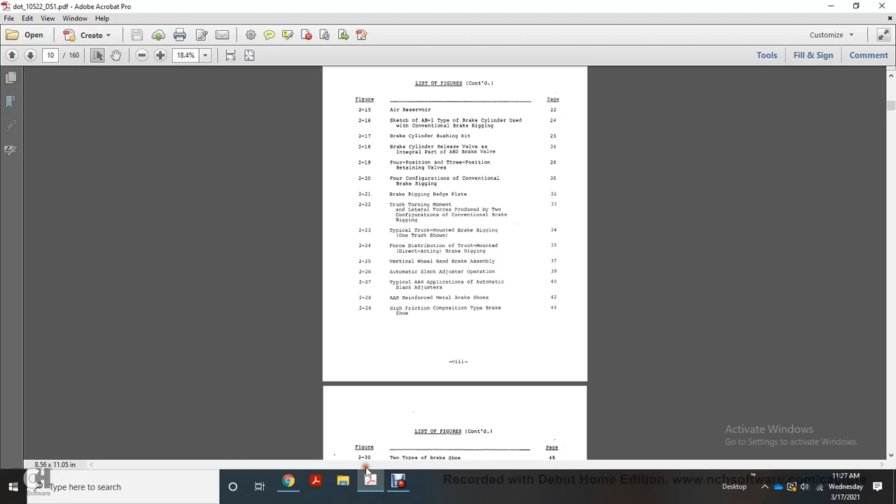Report number FRA-ORD 7822. Brake System Design Optimization, Volume 2, Supplemental Data. April 1981 Final Report.

Document is available to the public through National Technical Information Services, Springfield, Virginia, 22161. Prepared for the U.S. Department of Transportation, Federal Railroad Administration, Office of Research and Development, Washington, D.C., 20590.

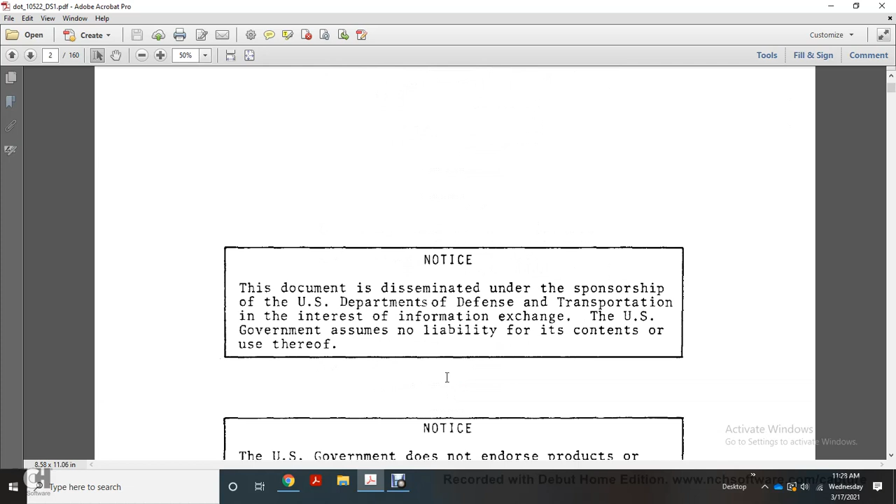This document is disseminated under the sponsorship of the U.S. Departments of Defense and Transportation. in the interest of information exchange. U.S. government assumes no liability for the contents and use thereof.

Notice: the U.S. government does not endorse products or manufacturers. Trade and manufacturer's names appear here only because they were considered essential to the objectives of this report.

And that gives you report number FRA-ORD 7822. The title is Brake System Design Optimization, Volume 2, Supplemental Data.

Preface. The work described in this report was carried out under the direction of the Transportation Systems Center of the U.S. Department of Transportation, in the context of an overall project with the Federal Railroad Administration, to provide a technical base for the improvement of rail transportation service efficiency, productivity, and safety. The work was sponsored by the FRA Office of Research and Development, Office of Freight Systems.

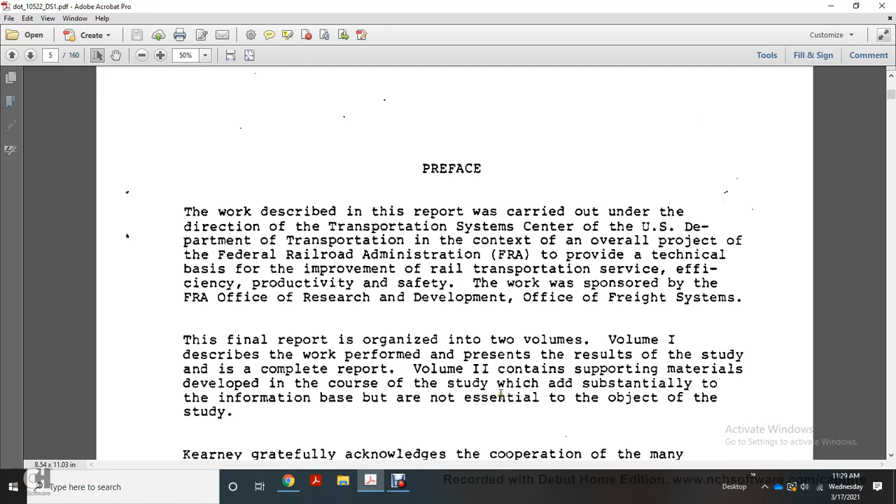The final report is organized in 2 volumes. Volume 1 describes the work performed and presents the results of the study as a complete report. Volume 2 contains the supporting materials developed in the course of the study, which add substantially to the information but are not essential to the objectives of the study.

We gratefully acknowledge the cooperation of many Railroad and Rapid Transit Companies, Manufacturer Research and Development Organizations, the AAR Brake Equipment Committee, and members of their staff and other interested parties who provided the information required to conduct a thorough, original, objective study. We would also like to thank DOT personnel in the Transportation Systems Center and the FRA for their cooperation throughout the course of the study.

And then it shows the metric conversion chart.

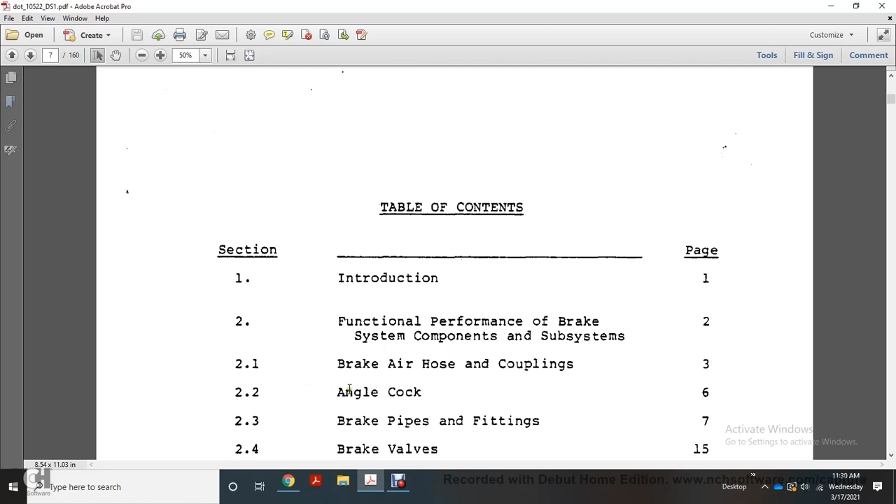Section 1 would be your introduction. Section 2 is functional performance of the brake system component subsystems, including the brake air hose, coupling, angle cock, brake pipe, fittings, brake valves, air reservoirs, brake cylinder release valve, retaining valve, brake rigging, handbrake, slack adjuster, and brake shoes. Then we move on to Section 3, Operation Performance and Design of the Freight Car Air Brake System: introduction, operation performance, problems.

Chapter 4 would be Railroad and Private Car Owner Survey: introduction, data requested from railroad survey, data requested from private car owners, results of the survey, thermal capacity of the freight car wheels.

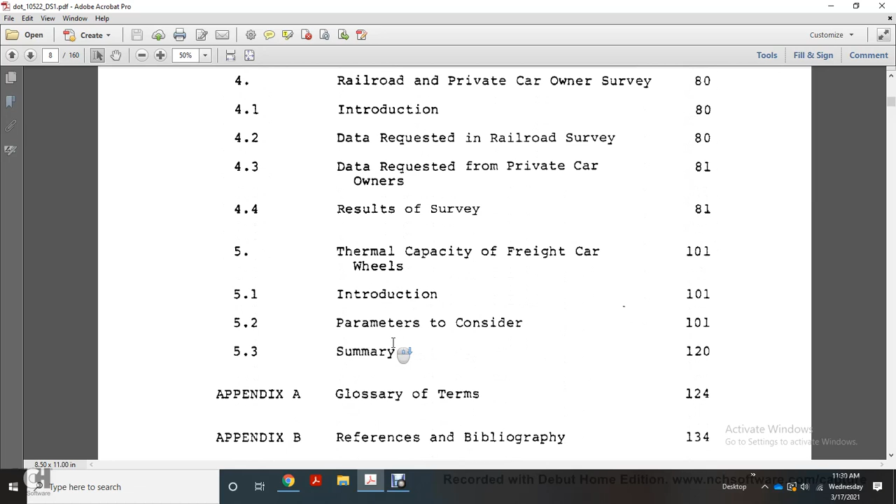Chapter 5 begins with introduction, parameters considered, summary, glossary of terms in Appendix A, and Appendix B, references, bibliography. List of figures: arrangement, brake system component, typical freight car, air hose coupling, typical angle cock.

Air hose location for the car with more than 5 foot 6 inch overhang, pipe arrangement, typical freight car, pipe fittings, approximate brake pipe gradient versus temperature for a typical 100 car train, approximate brake pipe leakage versus temperature for a typical 100 car train.

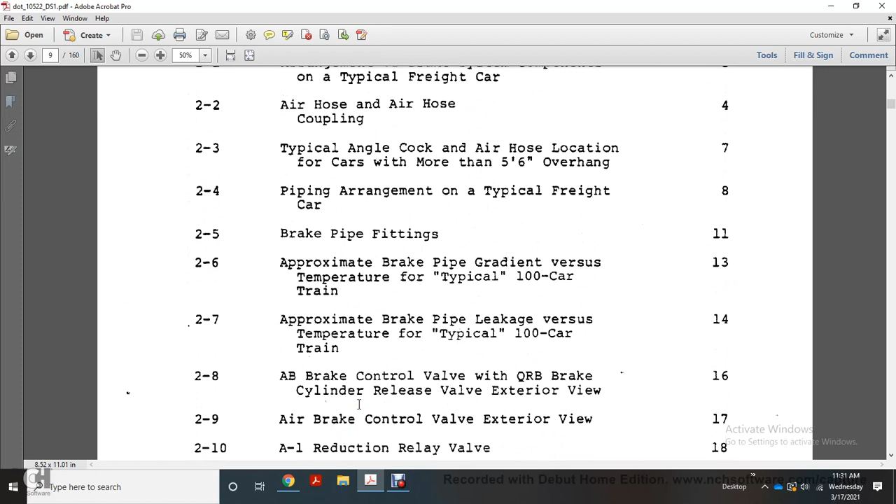Your AB control valve, quick release brake, cylinder release valve exterior view, air brake control valve exterior view, A1 reduction relay valve, the ABDW brake control valve, performance comparison, ABD, the ABDW brake valves.

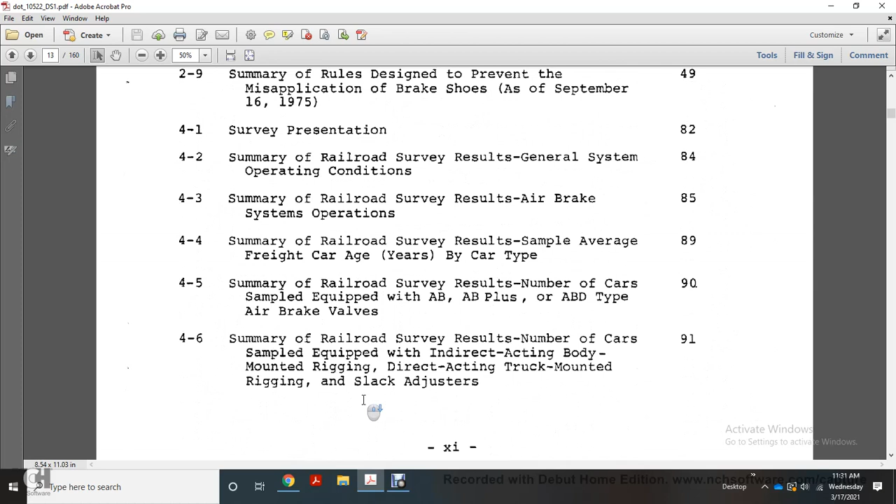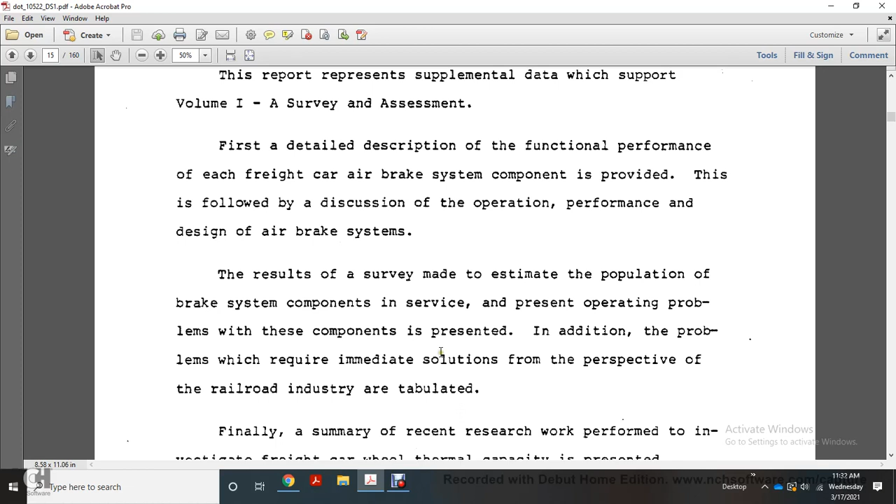Executive summary: this report represents the supplemental data in support of Volume 1 survey and assessment. First, a detailed description of functional performance of each of the freight car air brake system components is provided. This is followed with a discussion of operation performance and design of the air brake system, the results of a survey made with estimates of the population of brake system components, and the operation problems in which these components are presented, along with problems requiring immediate solution from the perspective of the railroad industry, tabulated. Finally, a summary of recent research work performed investigating freight car wheel thermal capacity is presented.

1. Introduction. The volume refers to the supplementary data of information which supports the material presented in Volume 1, Survey and Assessment. The volume includes 4 sections with 2 appendices. Section 2 covers functional performance of the brake system components.

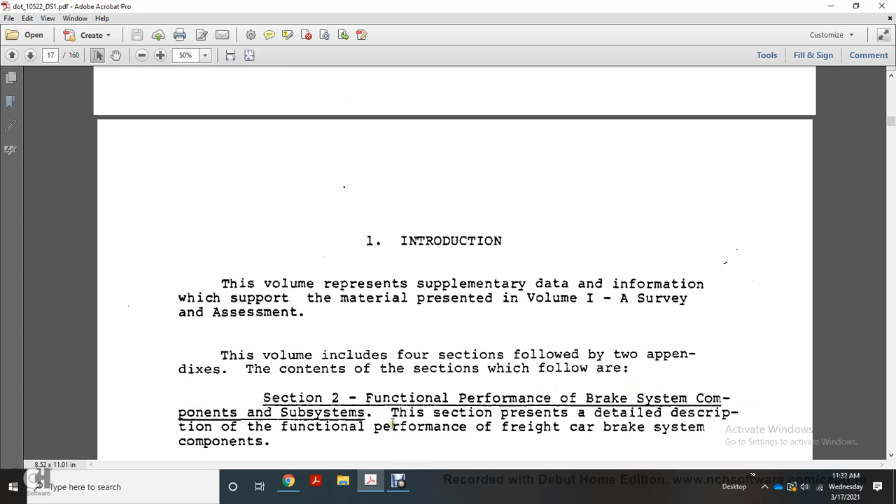Subsystem: this section presents a detailed description of the functional performance of the freight car brake system components. Section 3, Operation Performance and Design of the Freight Car Air Brake Systems, describes how various brake system components interact, and it delineates operating problems presently associated with each.

Section 4, Railroad and Private Car Owner Survey. This section presents the survey results of the railroad private car owner. The results include rail system operating condition of the air brake system, operating problems, air brake component populations, equipment being purchased, and special brake system equipment in service.

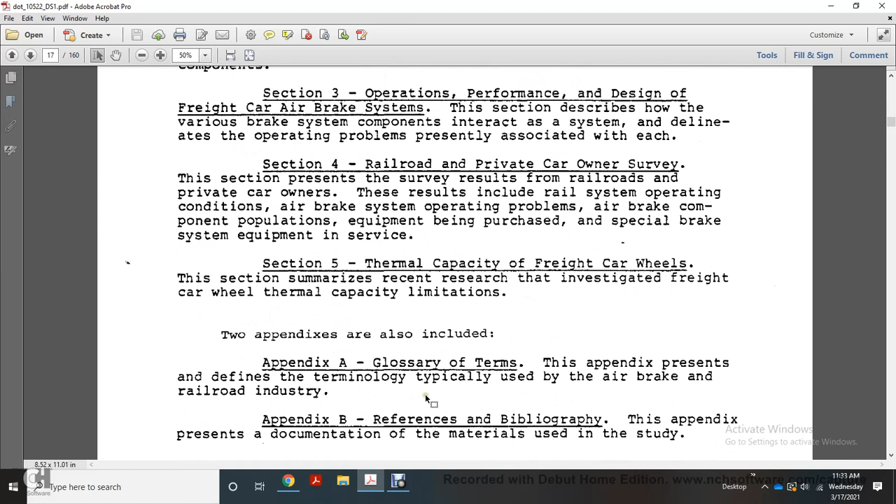Section 5, the thermal capacity of the freight car wheels. This section summarizes recent research that investigated freight car wheel thermal capacity limitations. Two appendices include a glossary of terms and a bibliography of references.

Section 2, Functional Performance of the Brake System Components and Subsystems. Functional performance characteristics of the selected brake system components and subsystems presently in use are presented in the following order: brake air hose couplings, angle cocks, brake pipes, fittings, brake control valves, air reservoirs, brake cylinder release valve...

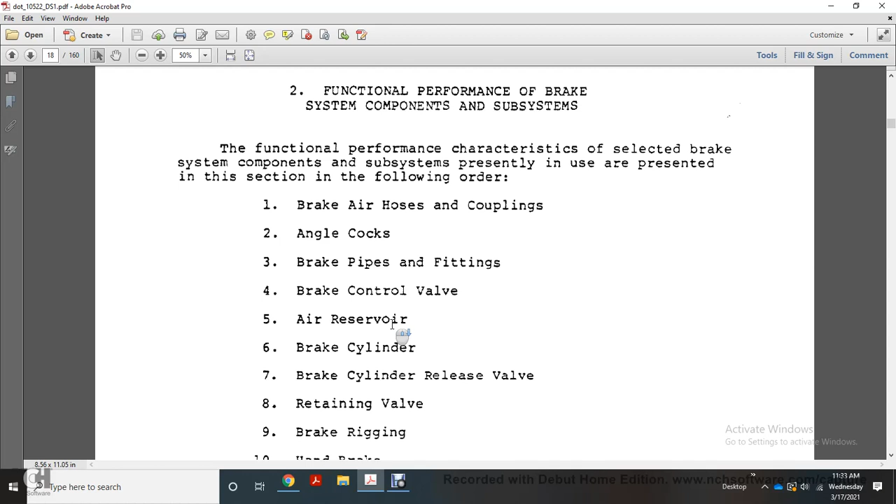Retaining valve, brake rigging, handbrake, slack adjuster, brake shoes. Each of the above brake system components and subsystems is discussed in terms of the need for the development of the performance, and any problems associated with their use.

Figure 2.1, presented on the following page, aids in illustrating the location of components on a typical car, indicating the function and interaction of the components with respect to a freight car brake system.

This shows the brake pipe, retainer, the ABD valve, the release rod, combined auxiliary emergency reservoir, auxiliary lever, brake cylinder, slack adjuster.

Cylinder lever, top rod, top lever connection, bell crank, brake shoe, hose and coupling, angle cock, handbrake, and truck lever.

Figure 2-1 shows an arrangement of brake system components for a typical freight car, sourced from the Air Brake Association, 1972, used by permission of the copyright owner.

2.1 Brake air hose coupling. The air hose coupling glad hands provide a flexible brake pipe connection between cars in a train.

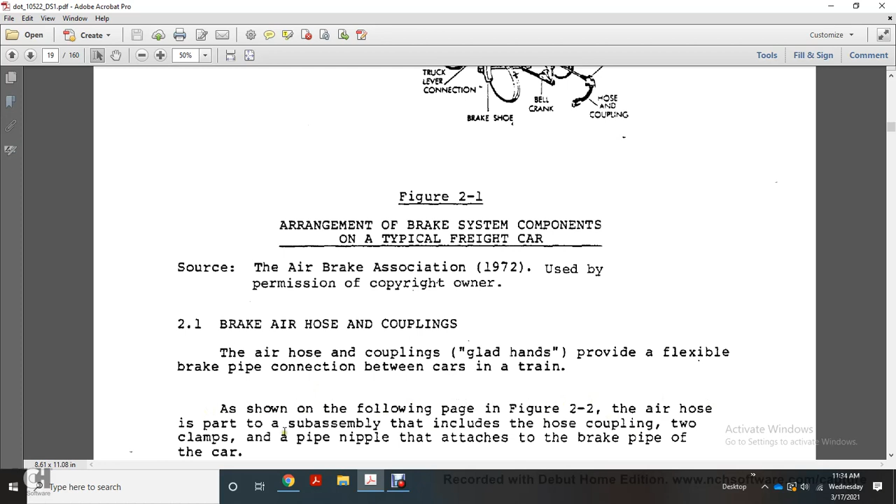Source: Association of American Railroads, 1978b, page E-51-1978, used with permission of the copyright owner.

The air hose coupling glad hands incorporate rubber gaskets to form a seal. They are connected manually by raising the two air hoses at the proper angle and lowering them in such a manner as to allow the coupling to rotate relative to each other, causing the flanges of the coupling to engage.

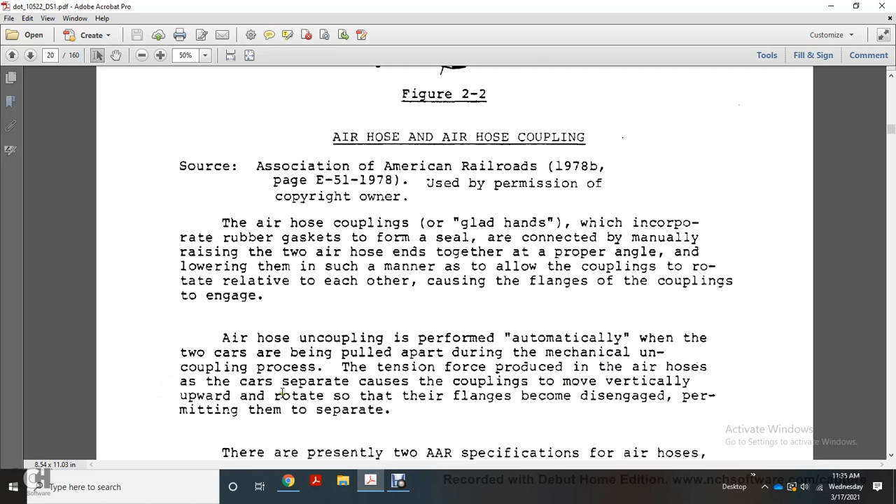Air hose uncoupling is performed automatically when the two cars are separated, as part of the mechanical uncoupling process. The tension force produced in the air hoses after the cars separate cause the coupling to move vertically upward and rotate, so that their flanges become disengaged, permitting them to separate.

There are presently two AAR specification air hoses: specification M601-71, the AAR standard, and specification M601-53, the AAR alternative standard. Both types of air hose have been tested in recent years with primary emphasis on improving air hose life, including air hose with braided steel wire reinforcement and materials such as neoprene.

The primary disadvantage of using the alternative material has been extreme hose rigidity encountered during cold weather operation, which makes it difficult or impossible for one man to manually bend the hose into the coupling position.

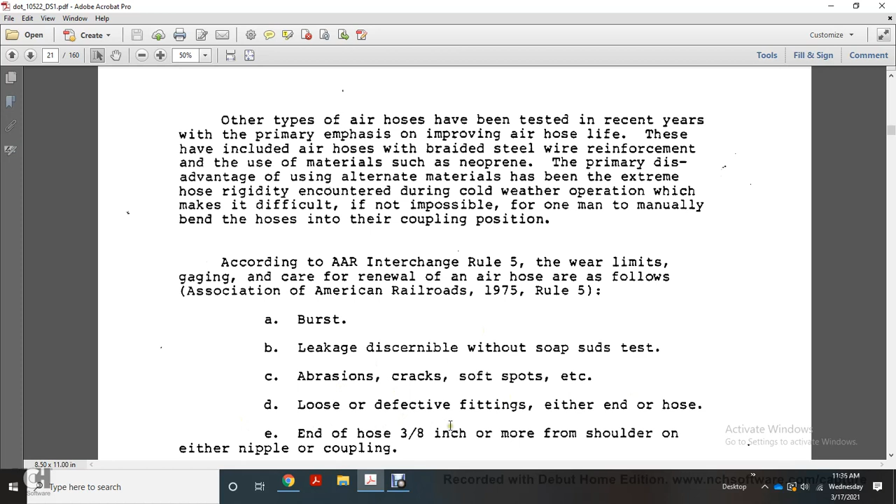According to AAR Interchange Rule 5, the wear limits, gaging, and care for renewal of an air hose are, as follows: Association of American Railroads, 1975, Rule 5 - a burst leakage is discernible with a soap and suds test; abrasion, cracks, and soft spots; loose or defective fittings at either end of the hose; three eighths inch or more from shoulder on either nipple coupling; porosity determined by the soap and suds test; splices; over eight years old as determined by the date on the hose; date obliterated; at time of COT&S or IDT&S of air brake hose missing.

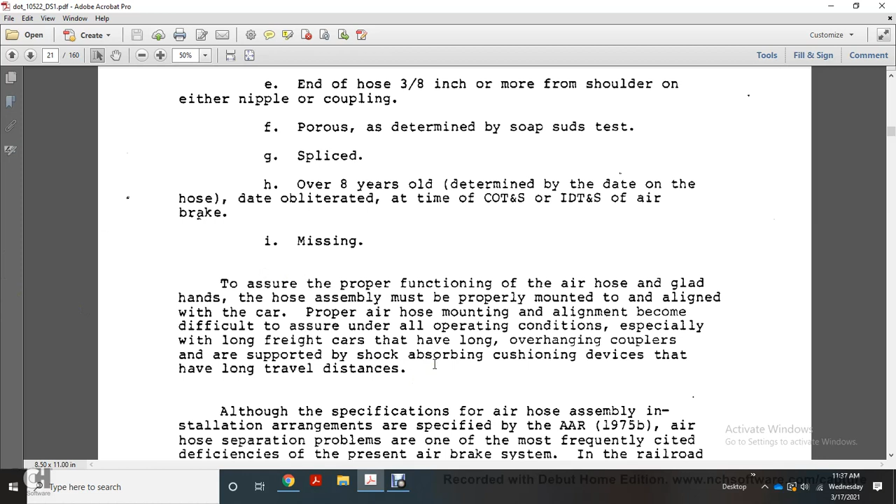To ensure proper function, the air hose glad hand assembly must be properly aligned with the car. Proper air hose alignment may become difficult to assure under all operating conditions, especially with long freight cars having long overhanging couplers, or those supported by shock absorbing cushion devices with long travel distance.

Although specification air hose and some of the installation arrangements specified by the AAR 1975-B address air hose separation, these problems are among the most frequently cited deficiencies present in air brake systems, according to the railroad data survey performed for the current project.

12 out of the 17 railroads included air hose coupling in the end-of-car arrangement as one of the areas that should be given the highest priority, as shown in Table 4-5 in Improving the Freight Train Braking System.

Section 2-2, angle cock. As shown in Figure 2-1, the angle cock is normally attached to the end of the brake pipe at each end of the car. The purpose of the angle cock is to provide a manual positive airflow cutoff of the brake pipe.

The angle cock is typically used when a portion of the train is moved separately during the picking up and setting out of a block of cars from a road train.

For example, if a block of cars is to be set out at the head end, the trainman would manually close the angle cock on the rear of the last car of the head end block to be set out. Upon uncoupling the train at this point, the air hose would separate, throwing the rear unattended portion of the train into an emergency application to prevent it from moving.

This would occur because the angle cock on the front end of the front car would be left in its open position. The front portion of the train could then be moved with the air brakes properly charged and functioning.

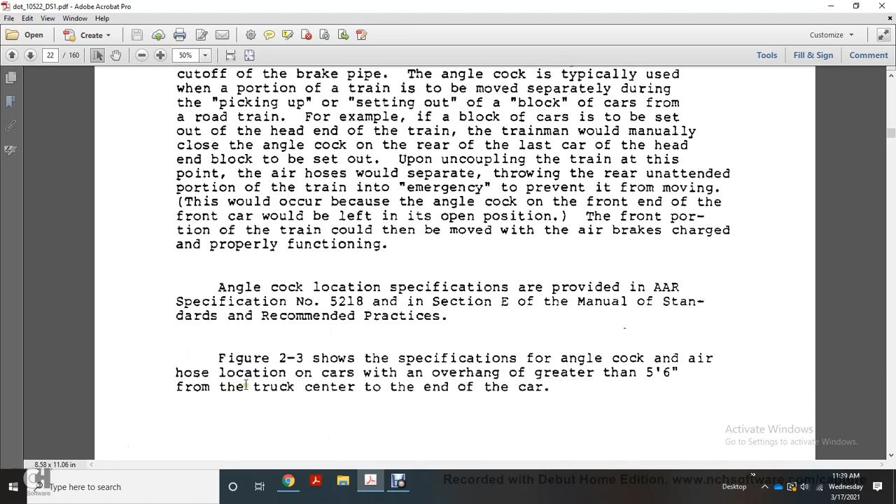Angle cock location specifications are provided in AAR specification number 5218, Section E of the Manual of Standards and Recommended Practices. Figure 2-3 shows the specified angle cock and air hose location for cars with overhang greater than 5 feet 6 inches from the truck center to the end of the car.

That shows the typical angle cock and air hose location for cars with more than 5 foot 6 inch overhang. Association of American Railroads, 1978b, p. E-32A-1976, used with permission of the copyright owner.

Suitable angle cock location difficulties specify a long car with certain coupler cushioning devices, in addition to the air hose separation problem discussed previously. Both angle cocks and air hoses can be damaged by bypassed coupler impact during switching and classification operations.

Section 2-3, brake pipe and fittings. The brake pipe, like the one shown in Figure 2-1, is constructed with 1 1/4 inch extra heavy pipe. The 1 1/4 inch diameter is selected as the optimum diameter to satisfy both the airflow volume requirements for the brake pipe and the length of the train.

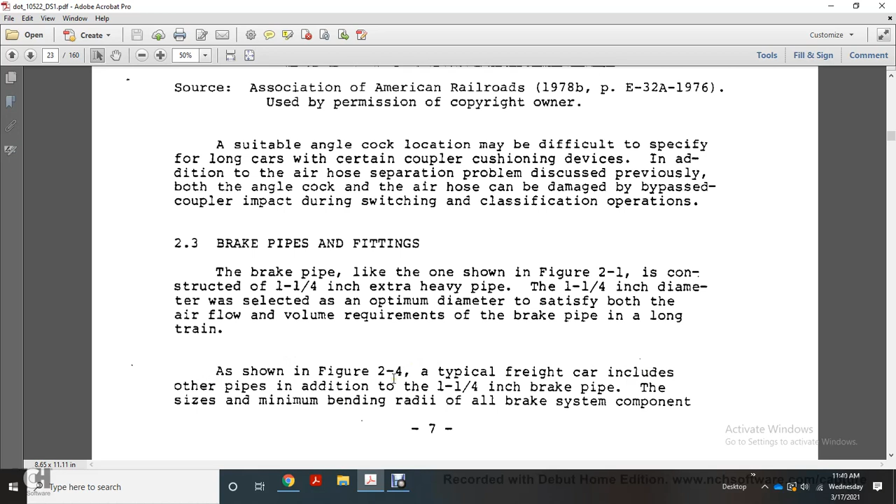Figure 2-4 shows a typical freight car, which includes other pipes in addition to the 1 1/4 inch brake pipe. The size and minimum bend radii for all brake system component pipes are specified by the AAR Manual of Standards and Recommended Practices. Figure 2-4 shows the piping arrangement.

This will be blown up to 100, and it's still a little hard to read, I guess. But anyway, here are the brake valve views, the brake cylinder, and it shows the brake pipe, and then the glad hand over here, and a T joint.

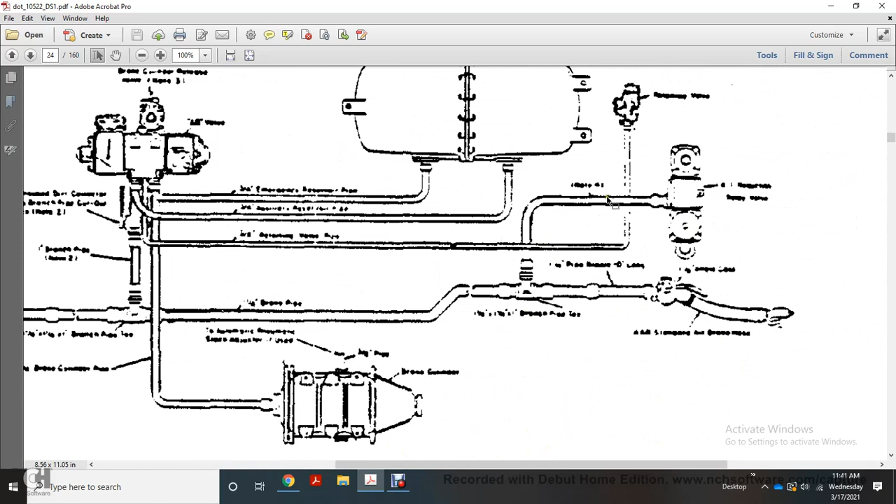Air Brake Association, 1972, used with permission of the copyright owner. That was the brake piping arrangement of the typical freight car pipe installation, per AAR specification number 2518.

One of the primary functional performance aspects of the brake pipe and the air brake system as a whole is the leakage present at the connection fittings on the various brake pipe components throughout the air brake system.

A paper by Palmer, 1975, dealt with the various air brake system leakage improvements made over the past 50 years, defining two sources of leakage: brake pipe leakage, which includes the hose assembly, angle cock, and brake pipe charging ports for the AB type and control valve; and system leakage.

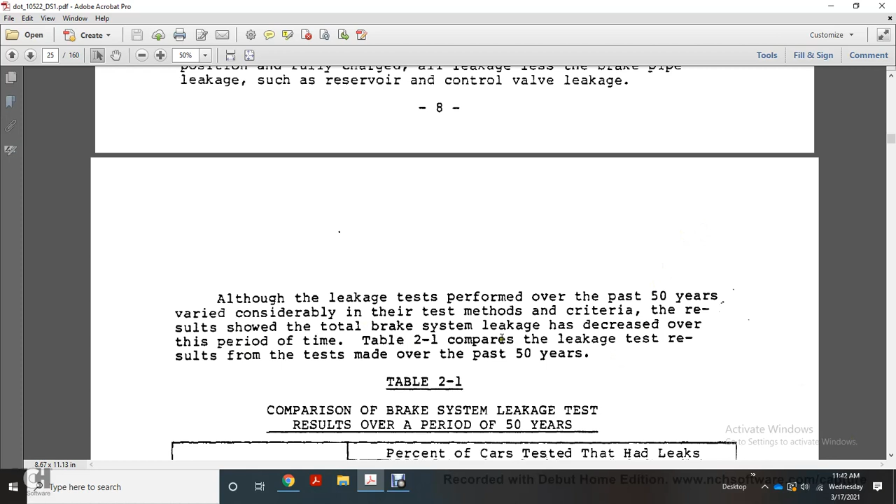The test results show that total brake system leakage has decreased over the period of time. Table 2-1 compares the leak test results of tests made over 50 years, showing the comparison of brake pipe leakage tests over that period.

You have 1925, 1950, 1975, 1925, 1950, and 1975. Based on the percent of the cars tested that had leaks, based on total leaks, based on total cars. And then you show the source: hose leakage, angle cocks, brake pipe, branch pipe, brake valve, reservoir, based on percent. The results in Table 2-1 of the different tests with the criteria illustrate that air brake system leakage decreased over the period.

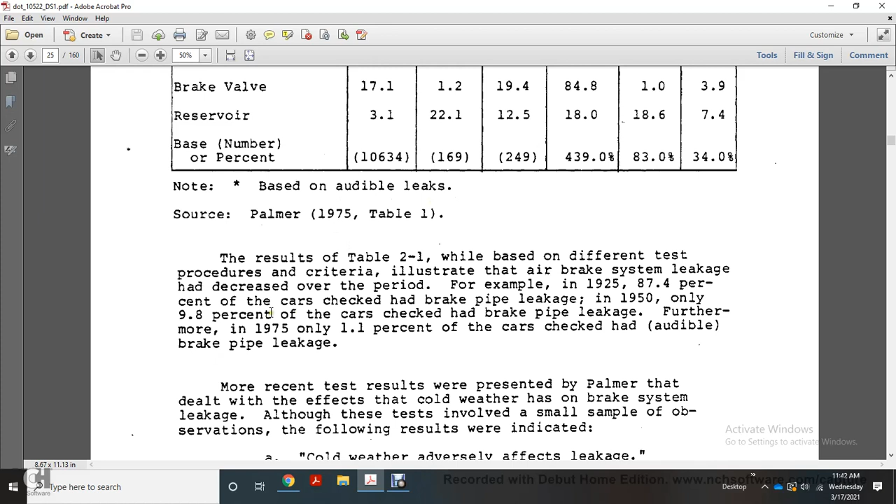For example, in 1925, 87.4% of the cars checked had brake pipe leakage. In 1950, only 9.8% of the cars checked had brake pipe leakage. Furthermore, in 1975, only 1.1% of the cars checked had audible brake pipe leakage. The most recent test dealt with the effect of cold weather on brake system leakage.

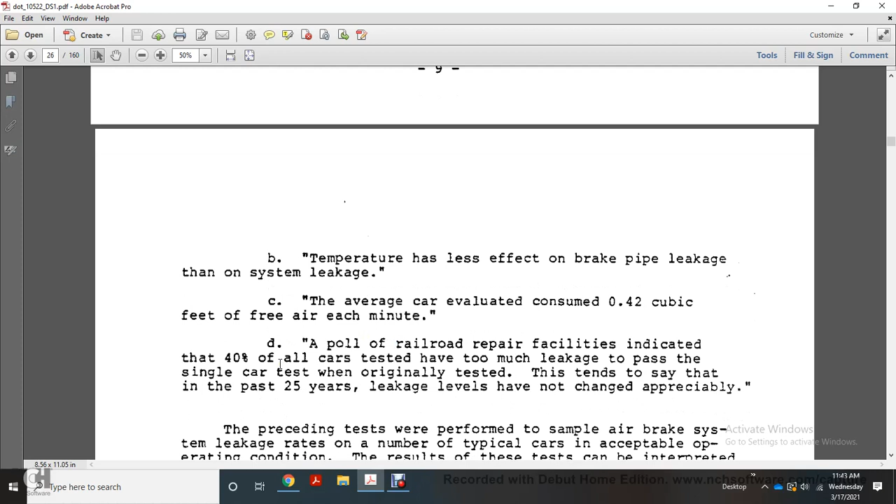Although the test involved a small sample of observations, the results indicated cold weather adversely affects leakage. Temperature had less effect on brake pipe leakage. The system leakage of the average car consumed 0.42 cubic feet of free air each minute. A poll of railroad repair facilities indicated that 40% of all cars tested had too much leakage to pass the single car test when originally tested. This tends to say that in the past 25 years, leakage levels have not changed appreciably.

Tests were performed on a sample of air brake system leakage rates for a number of typical cars in acceptable operating condition. The results of these tests were interpreted in view of the historical development of the brake pipe fitting. Prior to the 1950s, brake system leakage commonly resulted from a fracture of the threaded area of the brake pipe fitting. Early in the 1950s, fittings were introduced employing rubber compression grips. However, the leakage problem persisted during cold weather due to insufficient tightening of the gland nuts on the compression fitting. This led to the introduction of welded fittings.

Present AAR rules require the replacement of compression fittings with welded fittings when the car is in the shop for 150 or more man hours of work. Compression fittings and welded fittings are illustrated in Figure 2.5. Alright, compression fitting on the top: the compression ring, the pipe lock ring, or pipe lock ring body, flange ring, welded fitting, brake pipe fitting. Figure 2.5 shows the brake pipe fitting.

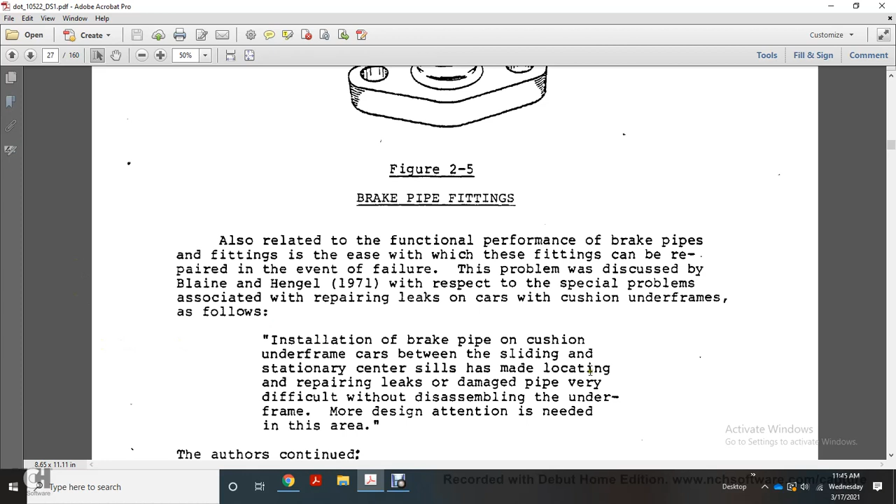Also related to the functional performance of the brake pipe and fittings, even with the repair of the fittings, failure of the pipe was a problem discussed by Blaine and Hengel in 1971 with respect to the special problem associated with repairing leaks on cars with cushioning underframes. With the brake pipe on cushioned underframe cars located between the sliding and stationary center sill, locating and repairing leaks in damaged pipe is very difficult without disassembling the underframe. Attention is needed in this area.

The author continues: brake pipe leakage is one of the major contributors to poor train handling. This defect can be due to leaks in the pipe, improperly anchored train line fittings which allow the pipe to shift during coupling and slack action, and defective air hose gaskets and angle cocks. Sometimes this type of defect is not easily detected during the terminal test. During train movement and stretching out of the train, leaks in the train line occur.

Inadequately anchored cars with compression fittings seem to be more vulnerable, and it becomes a real problem with the brake pipe attached to the sliding sill of the cushion car. Unfortunately, in many instances, there is the alleged practice of torch cutting access holes in stationary center sills in order to tighten hidden fittings.

In addition to affecting overall train braking performance, leakage has a direct impact on freight train operation. The rules governing the operation of a freight train require that air brake leakage be less than 5 psi per minute and brake pipe pressure gradient be less than 15 psi. It is common practice to limit train length in cold weather operation in order to meet legal minimum leakage requirements, as shown in Figure 2.6 on the following page.

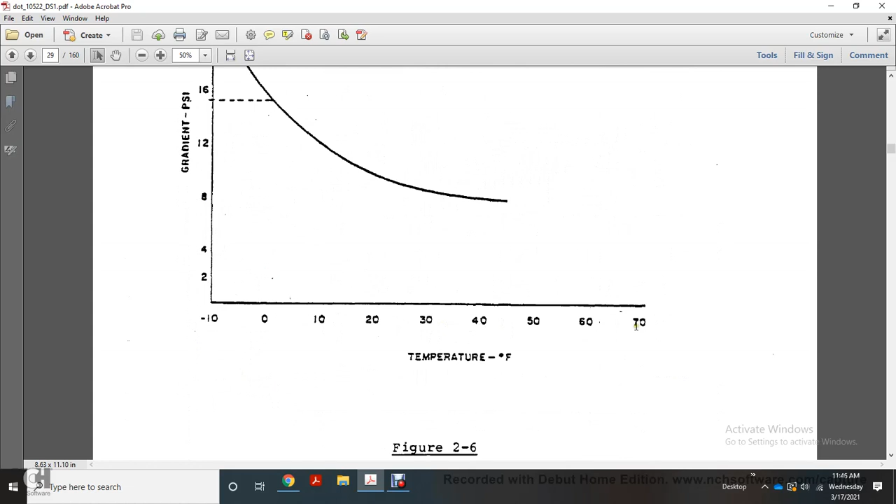A maximum brake pipe gradient of 15 psi is difficult to achieve with over a 100 car train operated at ambient temperatures below 0 degrees Fahrenheit. And then it shows the gradient in psi versus the temperature in degrees Fahrenheit, in 10 degree increments: approximate brake pipe gradient versus temperature for a typical 100 car train.

Palmer 1975, curve 1, used with the permission of the copyright owner. A comparison curve of brake pipe leakage versus ambient temperature is shown in figure 2.7 on the following page. It shows the typical approximate brake pipe leakage versus temperature for a typical 100 car train: temperature in degrees Fahrenheit, brake pipe leakage in PSI per minute.

Palmer 1975, used with the permission of the copyright owner. As shown in figure 2.7, the maximum brake pipe leakage requirement of 5 psi per minute is difficult to achieve with a 100 car train when the ambient temperature drops below the freezing point. While both curves shown in figures 2.6 and 2.7 are approximate, they do illustrate that the leakage limit is more restrictive than the brake pipe gradient limit.

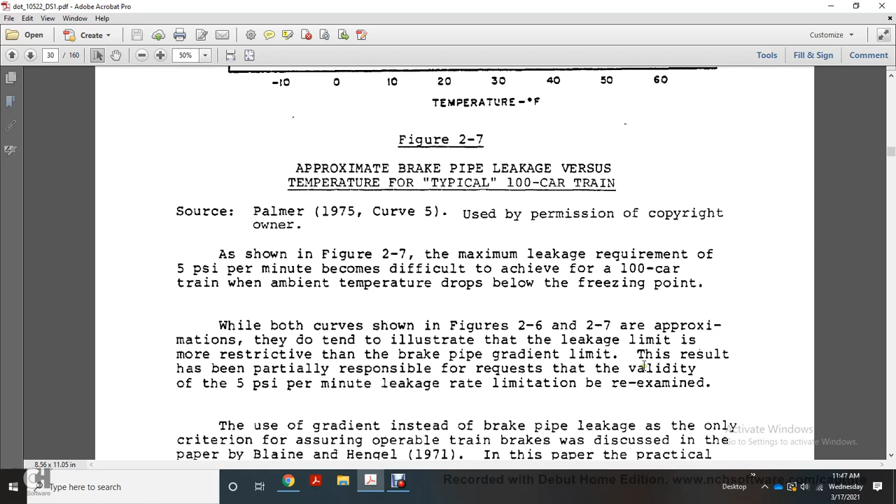As a result, the validity of the 5 psi per minute leakage rate limitation was re-examined. Use of the gradient instead of the brake pipe leakage as the only criterion to ensure operable train brakes was discussed in the 1971 paper by Blaine and Hengel. The practical limit for satisfactory brake control was assessed as an airflow demand of 60 cubic feet a minute or less, by establishing a relationship between the brake pipe

gradient and leakage. The authors concluded that to keep the airflow rate within 50 to 60 cubic feet a minute, the gradient must be held to 5 psi with 50 cars, 10 psi with 100 cars, and 15 psi for 150 cars. The corresponding brake pipe leakage is 20 psi a minute for 50 cars, 12 psi a minute for 100 cars, and 8 psi a minute for 150 cars. However, at 8 and 10 psi a minute of brake pipe leakage, stopping distances become adversely affected.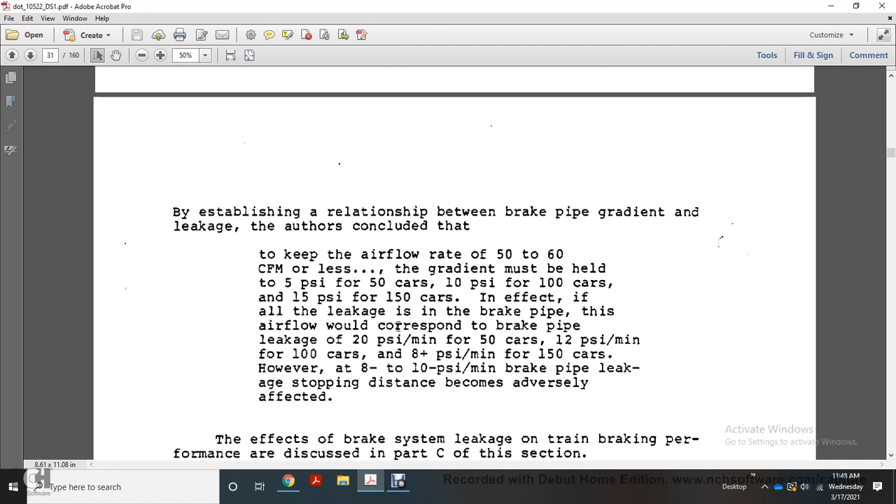The effects of brake system leakage on train brake performance are discussed in part C of this section. 2.4 Brake valve. The functional performance specifications for the brake valve are contained in the AAR's Manual of Standards and Recommended Practices, the specifications pertaining to the operational response of the brake valve with respect to its relationship with the other components of the air brake system of the freight train.

The functional performance characteristics of the brake valves in use today are described in terms of the AB and ABD types of brake valve, with the addition of the more advanced brake valves presently under evaluation, including the ABDW and the Z1A. The primary functions and performance aspects of each of the valves are discussed in the following paragraphs. 2.4.1 AB brake control valve. The AB valve is the oldest and most common of the control valves today.

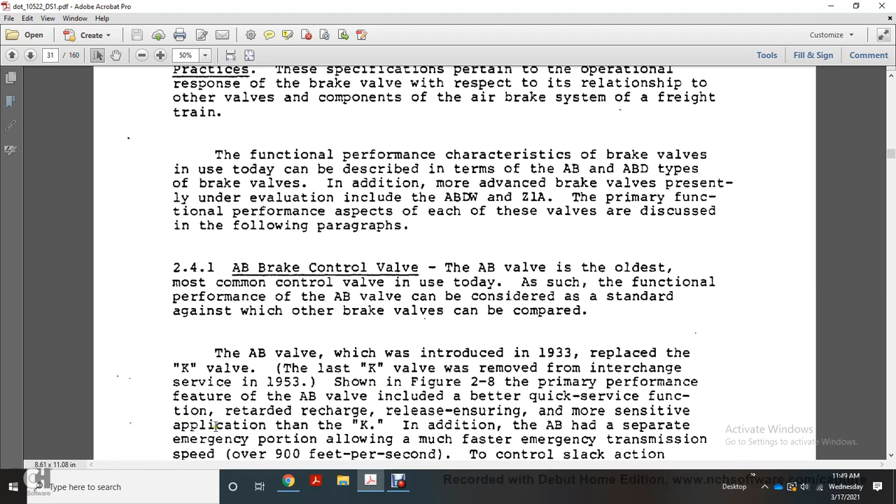Each of the functions and the performance of the AB valve could be considered the same as the other brake valves compared. The AB valve was introduced in 1933, replacing the K valve. The last K valve was removed from interchange service in 1953. As shown in figure 2.8, the primary performance features of the AB valve include better quick service, the retarded recharge and release functions, and being more sensitive to application than the K.

In addition, the AB had a separate emergency portion allowing a much faster emergency transmission speed of over 900 feet per second to control the slack action. During brake application, the AB provided an initial fast and limited brake cylinder pressure to bunch slack, followed by a more gradual pressure build-up, giving full pressure within approximately 12 seconds.

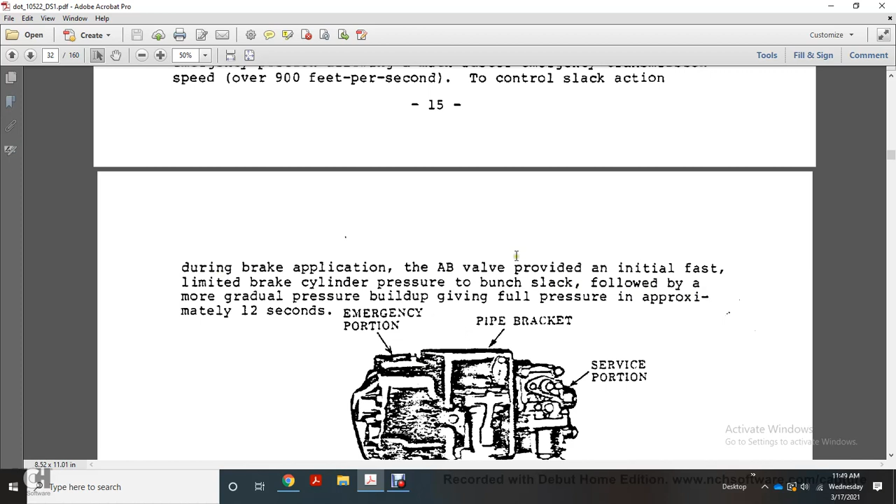Figure 2.8 shows the AB control valve with the quick release brake cylinder release valve, exterior view: brake cylinder release valve, release valve position, reservoir release position, service portion, pipe bracket, emergency portion.

Source: Air Brake Association, used with the permission of the copyright owner. With the AB brake, a full emergency application for a 150 car train required approximately 17 seconds, whereas a full service application would require 2 to 3 minutes for development throughout the train (Blain, 1975B).

The maintenance requirements of COT&S of the AB valve at present are based on a period of 48 months. 2.4.2, the ABD control valve. In the 1950s, with the operation of long freight trains, the need for greater flexibility in train braking operation became apparent. Desirable direct release features of the brakes were difficult to achieve with long trains, especially with leakage concentrated in the rear.

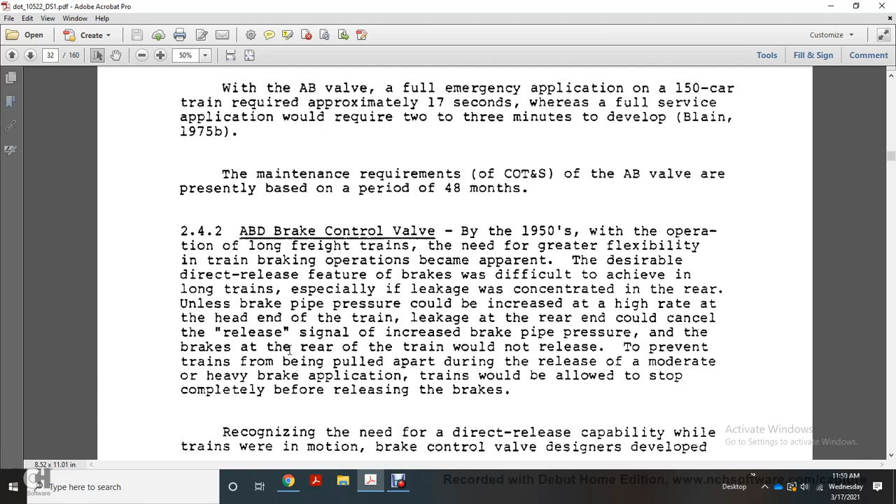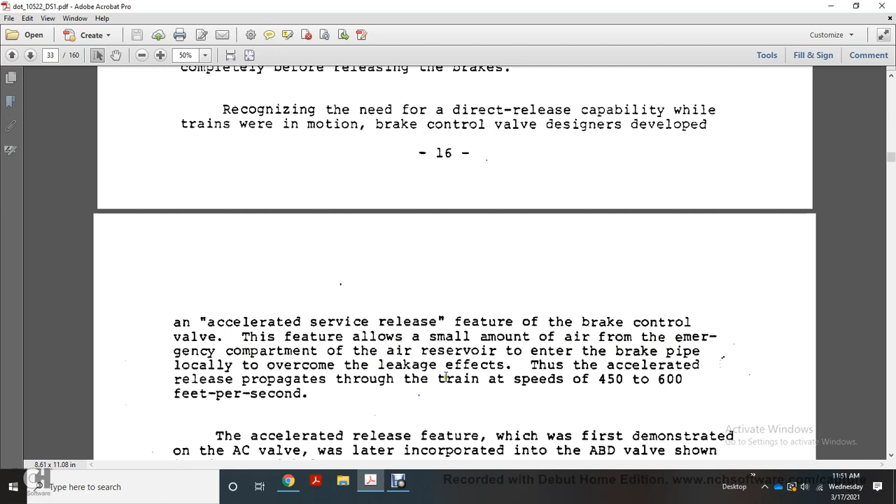Recognizing the need for direct release capability while the train is in motion, brake control valve designers developed the accelerated service release feature for the brake control valve. The feature allows a small amount of air from the emergency reservoir to be dumped into the brake pipe locally to overcome the leakage effects. Thus, accelerated release propagates through the train at speeds of 450 to 600 feet per second. The accelerated release feature was first demonstrated with the AC valve, later incorporated in the ABD valve shown in figure 2.9.

Figure 2.9, the ABD control valve, exterior view: emergency portion, combined release rod, release position, service portion, pipe bracket. Source: Air Brake Association, used with the permission of the copyright owner. Note the facility of conversion of the AB valve to the ABD valve: the service and emergency portions of the ABD valve mount on the original brake pipe bracket of the AB valve, see figures 2.8 and 2.9. By changing the design and material of the ABD valve, the COT maintenance period of the ABD valve was extended to 8 to 10 years, compared with 4 years for the AB valve (Air Brake Association, 1975C).

2.4.3, the ABDW brake valve. The ABD valve was designed to provide running release capability by producing faster, more effective brake pipe pressure increase. There was also a need to decrease the time to apply brakes on the train in order to reduce stopping distance. To assist with making brake applications for longer cars having more brake pipe, a device known as the A1 reduction relay valve was designed and applied.

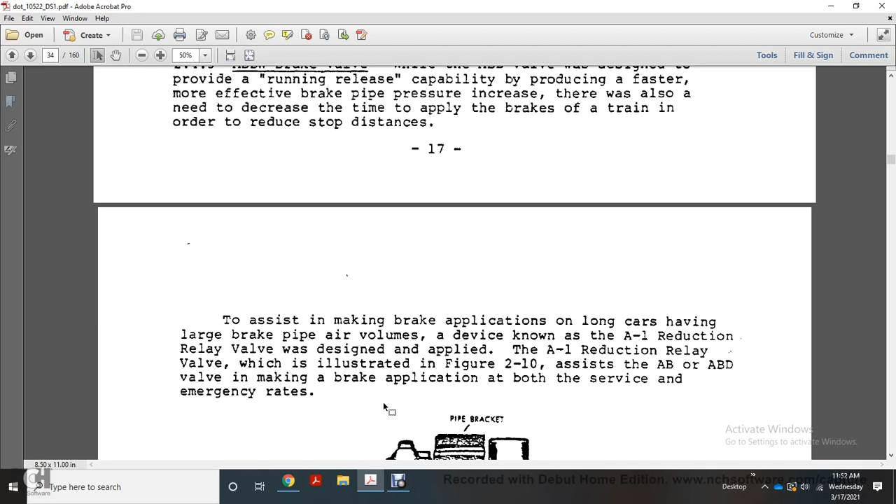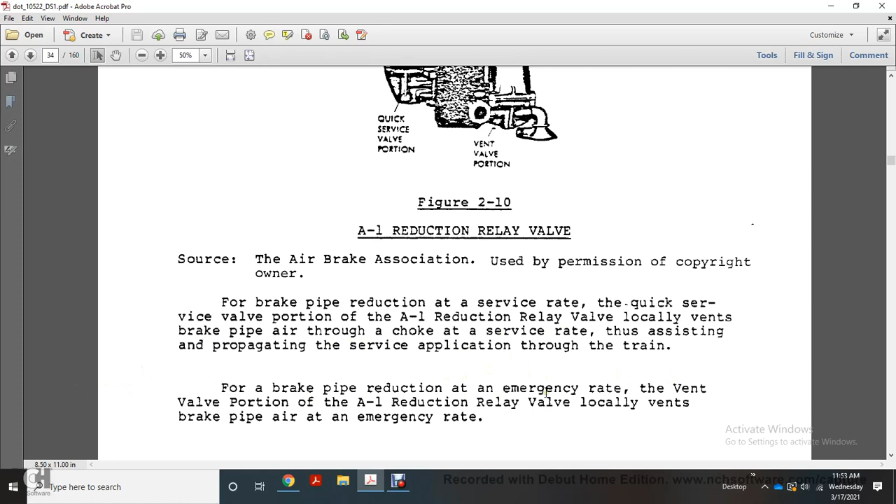The A1 reduction relay valve, illustrated in figure 2.10, assists the AB and ABD valves in making both service and emergency brake applications. The A1 reduction relay valve has a quick service valve portion, pipe bracket, and vent valve portion. Source: Air Brake Association, used with the permission of the copyright owner. On a brake pipe reduction at service rate, the quick service portion of the A1 reduction relay valve locally vents the brake pipe through a choke at service rate, thus assisting in propagating service applications through the train. On a brake pipe reduction at emergency rate, the vent valve portion of the A1 reduction relay valve locally vents the brake pipe air at emergency rate.

The requirements made mandatory the A1 reduction relay valve on all cars having more than 75 feet of brake pipe, with intent to prevent deterioration of brake performance with the increasing percentage of long cars. However, this feature was desirable for use on all cars regardless of their length, and in response to the need, the ABDW brake valve was designed to integrate a continuous quick service feature for the upgrade of service braking on all cars, at lower cost and with improved functional performance over the A1 reduction relay valve.

Wright, 1975. The ABDW valve is shown in figure 2.11. The schematic of the internal passages of the ABDW is presented in section 3, figure 3.3. So figure 2.11 shows the ABDW brake control valve. Figure 2.12 shows the manufacturer's performance comparison between ABD and ABDW control valves for full service brake applications.

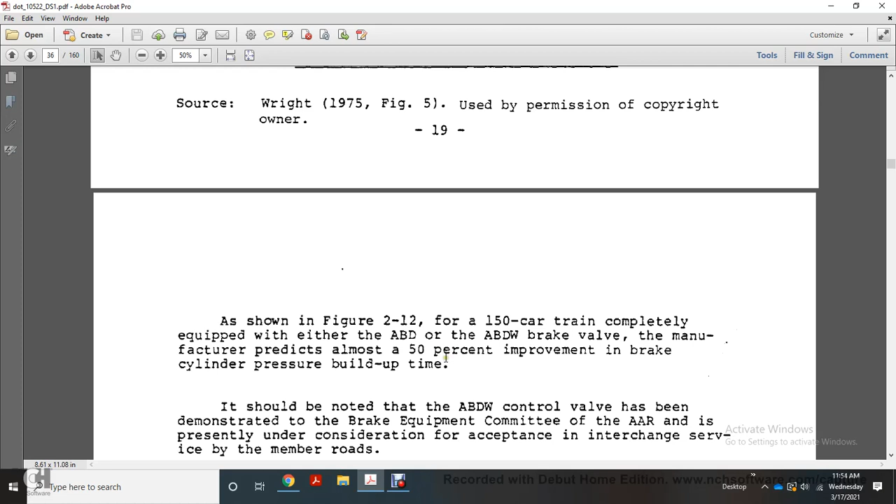As shown in figure 2.12, with a 150 car train completely equipped with the ABDW brake valve, the manufacturer reports almost 50% improvement in brake cylinder pressure build up time. The ABDW control valve has been demonstrated to the Brake Equipment Committee of the AAR and is presently under consideration for acceptance in interchange by the member roads.

Z1 brake control valve.

It is also designed for full compatibility in interchange with the ABD type of brake valve presently in use. The outline view of the Z1A brake control valve is shown in figure 2-13. Figure 2-13 shows the Z1A brake control valve.

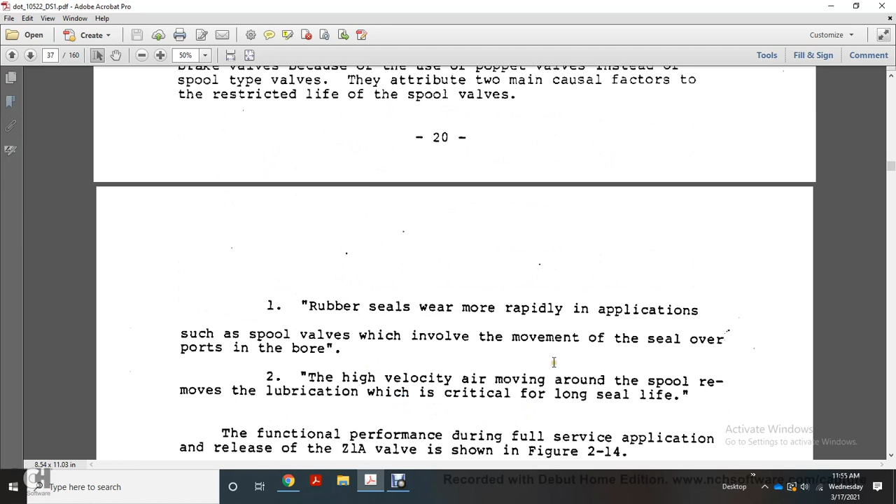According to the manufacturer, the Z1A would have longer potential life with lower maintenance cost than present brake valves, because of the use of a poppet valve instead of a spool type valve, attributed to the two main causal factors of restricted life with a spool valve Rubber seals wear more rapidly in applications such as spool valves, which involve movement of seals over the ports of the bore. The high velocity air moving around the spool removes the lubrication critical for long seal life. The functional performance during full service application and release of the Z1A valve is shown in figure 2-14.

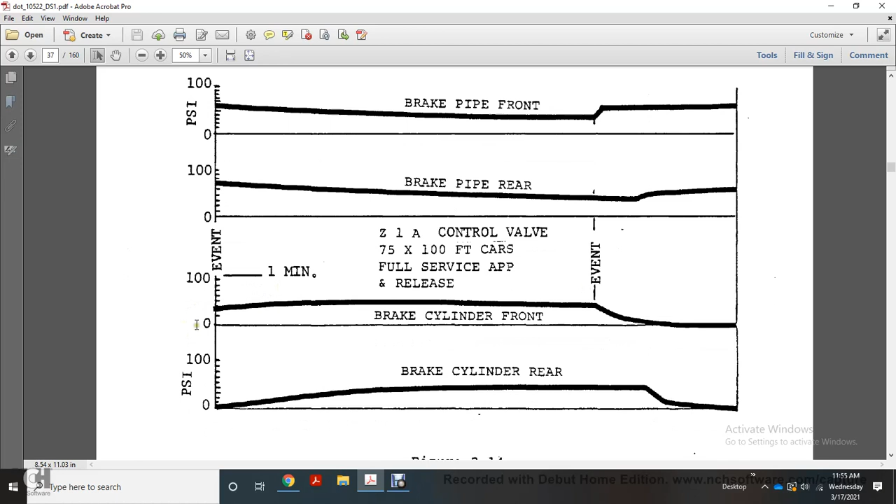Alright, this shows the brake pipe front and the brake pipe rear, the Z1A control valve, 75 x 100 foot cars, full service application and release, time in minutes, 0 to 100 psi, brake cylinder front, brake cylinder rear. This shows the functional performance of the Z1 brake control valve during full service application and release, Westinghouse Air Brake, 1975. 2.5 Air reservoir.

The purpose of the air reservoir is the storage of compressed air for the air brake as braking energy during brake release, to be delivered to the brake cylinder by the brake control valve on brake application. The air reservoir shown in 2-15 has two separate compartments: the auxiliary compartment that stores air for service brake application, and the emergency compartment that stores air for emergency brake application. Figure 2-15 shows the air reservoir, from Track Train Dynamics 1973, with permission of the copyright owner.

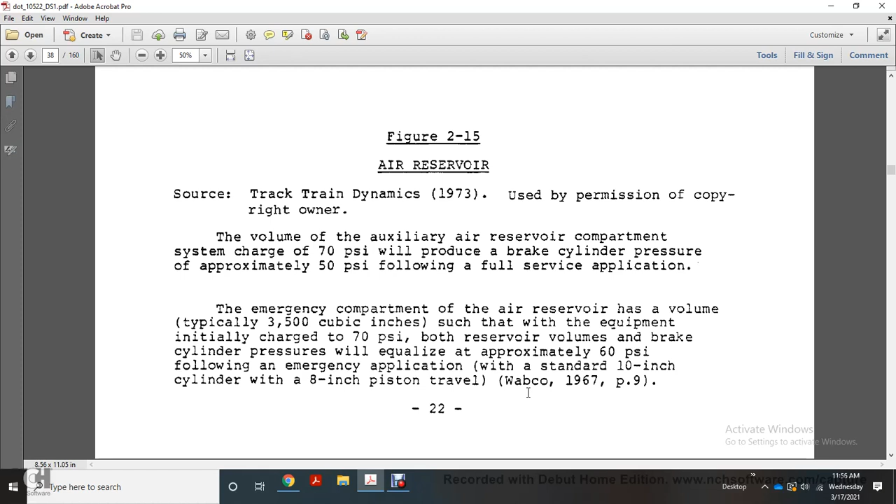The volume of the auxiliary air reservoir compartment, with a system charge of 70 psi, will produce a brake cylinder pressure of approximately 50 psi following a full service application. The emergency compartment air reservoir volume is typically 3,500 cubic inches, such that with the equipment initially charged to 70 psi, the brake reservoir and brake cylinder pressure equalize at approximately 60 psi following an emergency application, with the standard 10-inch cylinder and 8-inch piston travel, WABCO 1967, page 9. Table 2-2 shows the full service and emergency brake cylinder equalization pressure for different values of the initial brake pipe charge pressure.

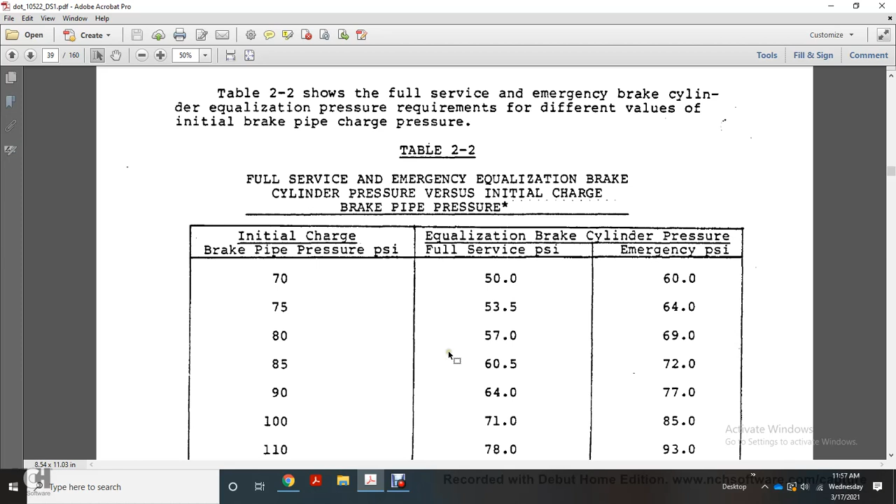Table 2-2: full service and emergency equalization brake cylinder pressure versus the initial charge of brake pipe pressure. It shows the initial charge brake pipe pressure and the equalized brake cylinder pressure for full service and emergency. You would have 70: 50 and 60; 75: 53 and 64; 80: 57 and 69; 85 initial brake pipe pressure charge: 61 full service, 72 emergency. Brake pipe pressure initial charge 90: 64 full service, 77 emergency psi; 100: 71 full service, 85 emergency; 110: 78 full service, 93 emergency.

As shown in table 2-2, the emergency equalization brake cylinder pressure is approximately 20% greater than the full service brake cylinder pressure regardless of the value of the initial brake pipe pressure, the result of the pressure-volume relation of the emergency auxiliary air reservoir compartment and the brake cylinder.

2.6 The brake cylinder. The purpose of the brake cylinder is to provide the braking force on the car by applying the brake shoe against the wheel during a brake application. Two types of brake cylinder exist. One type is the conventional indirect acting, with brake rigging, AB1 and ABU. The other type is direct acting, with truck mounted rigging. Figure 2-16 illustrates the AB1 type of brake cylinder used with conventional brake rigging.

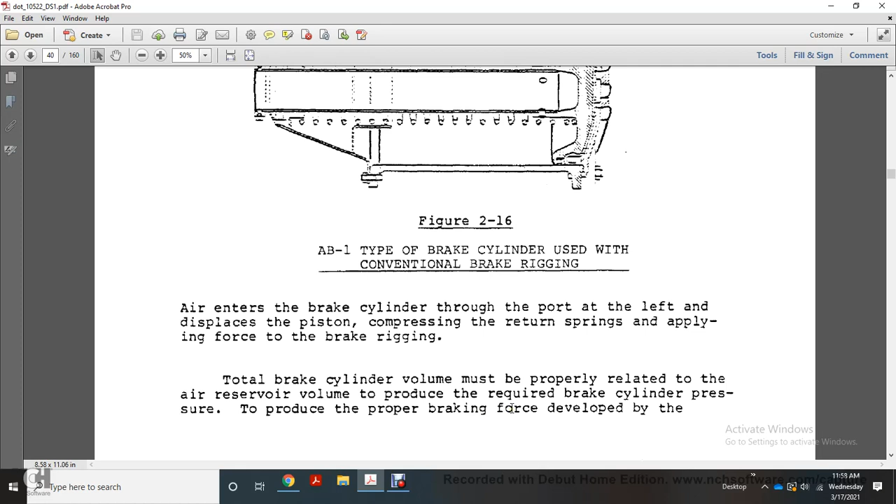Air enters the brake cylinder through the port at the left of the display, with the piston compressing the return spring, applying the force to the brake rigging. The brake cylinder volume must properly relate to the air reservoir volume to produce the required brake cylinder pressure for the proper braking force developed by the brake cylinder. Depending on high or low friction brake shoes, a brake cylinder with the proper diameter must be selected in the design of the brake system.

In addition, with the brake system, freight cars converted from using a low friction to a high friction brake shoe by installing a bushing kit in the brake cylinder to reduce the effective piston diameter, thereby producing lower brake force. A brake cylinder with a bushing kit installed is shown in figure 2-17. 2-17 shows the brake cylinder bushing kit.

2.7, the brake cylinder release valve. The purpose of the brake cylinder release valve is to permit the manual bleeding of the air from the brake cylinder of the car after the brake pipe pressure has been depleted in preparation for switching in the classification yard, eliminating the need to bleed the air reservoir compartments, thereby reducing the time needed to recharge the reservoir during outbound train preparation.

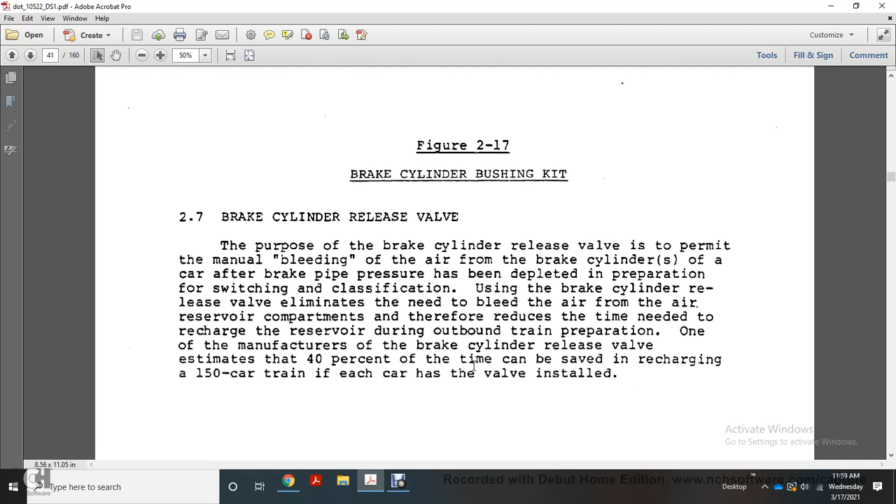One of the manufacturers of the brake cylinder release valve estimated that 40% of the time can be saved recharging a 150 car train with each car that has the valve installed. The brake cylinder release valve may be mounted on a pipe bracket with the AB valve, installed on the older AB brake valve with an adapter kit, with the ABD brake valve incorporating the brake cylinder release valve as a standard feature, shown in figure 2-18.

Manual actuation of the valve with a single momentary pull on the release valve depletes the brake cylinder pressure. Although the feature is desirable, car inspectors in several yards routinely bleed both the brake cylinder and the air reservoir by holding the release rod, to prevent the air in the reservoir from leaking through a defective brake cylinder release valve and reapplying the brakes. The problem was also described in the railroad survey results of Part B, Section 4, Table 4.3 through 4.11.

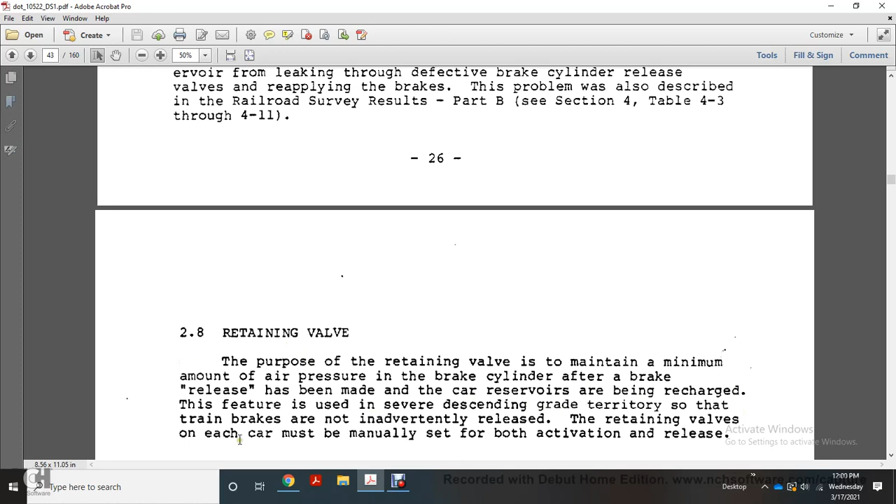2.8 retaining valve. The purpose of the retaining valve is to maintain a minimum amount of brake air pressure in the brake cylinder after the brake release has been made while the car reservoir is being recharged, a feature used in severe descending grade territory so that the train brakes are not inadvertently released. The retaining valve on each car must manually be both activated and released.

Prior to 1967, the retaining valve incorporated four positions, as shown. Direct EX, direct exhaust with no air restriction. EX HP retains 20 psi in the brake cylinder when train brakes are released. EX LP retains 10 psi in the brake cylinder when train brakes are released. EX SD, slow direct exhaust: brake cylinder pressure is completely exhausted, but at a slow rate.

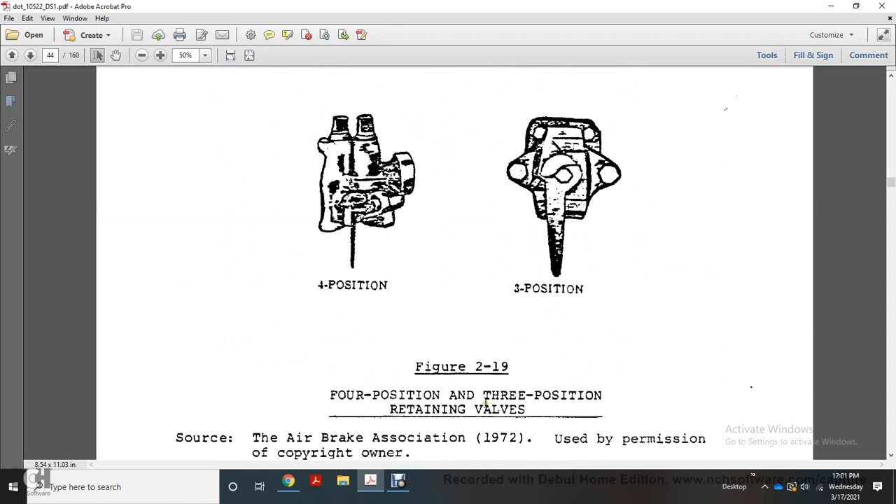In 1967, the three-position retaining valve was introduced, figure 219. The three-position retaining valve omitted the exhaust low pressure position and retained the exhaust high pressure and the slow exhaust position. The functional performance specification for both types of retaining valve is presented in the Association of American Railroads 1975B. Figure 219 shows the four-position and the three-position retaining valve.

Prior to the introduction of the dynamic brake on diesel electric locomotives, the retaining valve was used routinely for operating heavy freight trains on steep descending grades. Today, however, retaining valves are used only under certain circumstances, typically on severe grades where dynamic braking is not available, from coal mine tipples to yards and main lines, or on certain exceptionally steep, over 2%, main line descending grades, section 4, table 4.2.

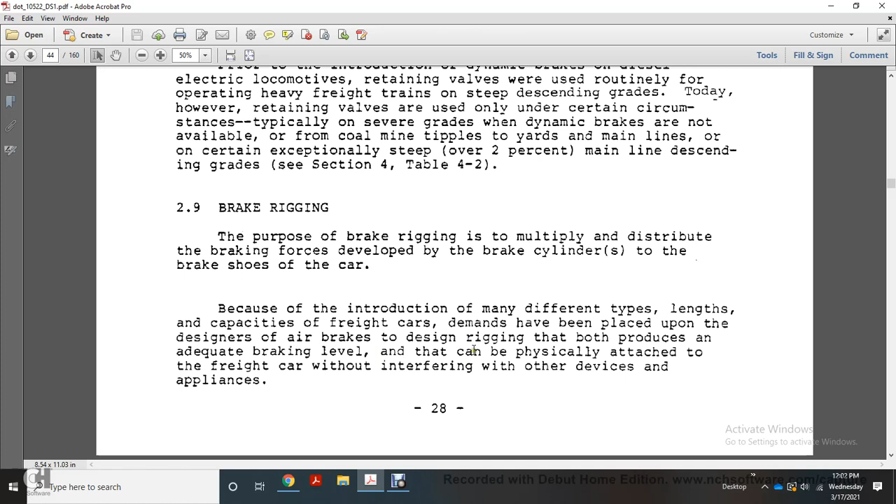2.9 brake rigging. The purpose of the brake rigging is to multiply and distribute the brake force developed by the brake cylinder to the brake shoes of the car. With the introduction of different types, lengths and capacities of cars, the brake rigging design had to produce adequate brake levels that can be physically attached to the freight car without interfering with other devices and appliances. Brake rigging used today is of two types: indirect acting, conventional rigging, and direct acting, truck-mounted rigging. Function and performance of both types of rigging are covered, such as the AAR net braking ratio specification.

See section 3. Conventional rigging, indirect acting, figure 220 illustrates the typical configuration of conventional brake rigging. Several different brake rigging arrangements can be used depending on the configuration of the car and other factors.

Achieving the required net braking ratio for the design of conventional brake rigging can cause the forces produced by the brake cylinder by selecting the proper lever ratio. However, the total lever ratio must be limited to a not greater than 12.5 to 1.

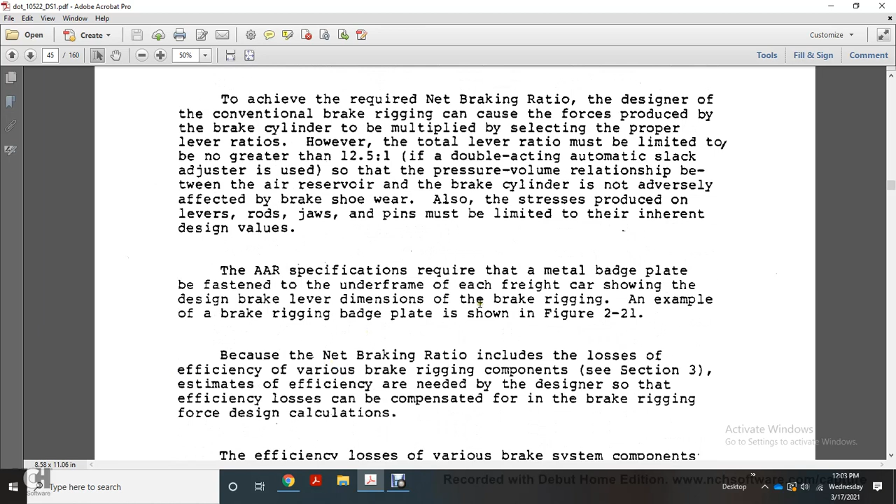The AAR specifications require a metal badge plate fastened to the underframe is shown on each of the brake cars, with the design brake lever dimensions for the brake rigging. An example of the brake rigging badge plate is shown in figure 221.

The net braking ratio includes the loss of efficiency of various brake rigging components. Section 3 estimates the efficiency needed for the design, so the efficiency loss is compensated for in the brake rigging force design calculation.

Efficiency loss of the various brake system components has been estimated from testing. The test results show the efficiency of various configurations of brake rigging differ considerably. Approximate efficiency values have been determined in table 2.3 on page 32.

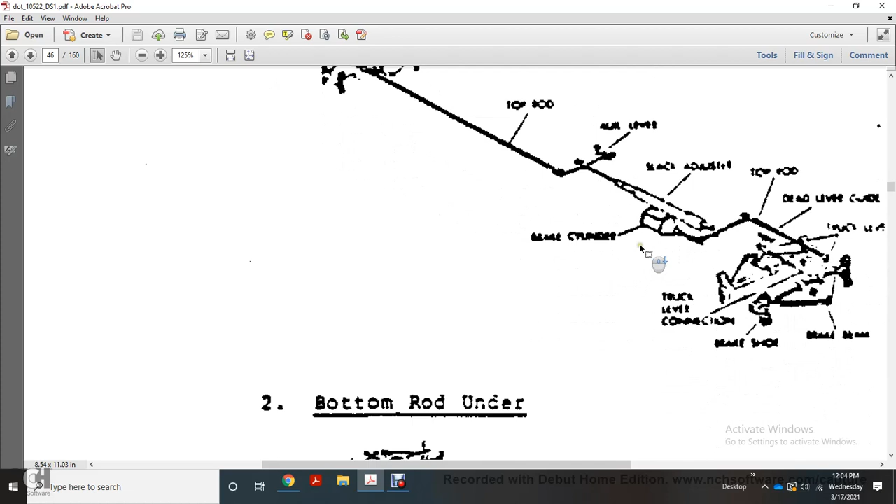The bottom rod runs through the bolster. Brake cylinder, left slack adjuster, bottom rod underhang, top rod underhook and eye. Three lever truck arrangement.

Figure 220 shows the four configurations of conventional brake rigging, from the Air Brake Association, 1970, used with permission of the copyright owner. This shows the brake badge plate shown on freight cars.

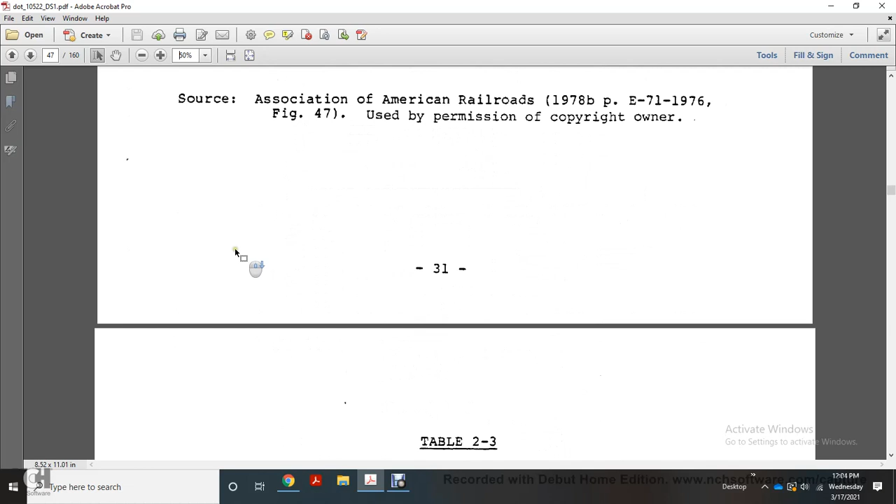Table 2.3, approximate values of the efficiency loss of the brake rigging: brake cylinder 7.5 inch components 11%, brake cylinder 8 inch 10%, 8.5 inch 9%, 10 inch 8%, 12 inch 7%, pins 1% per pin. Slack adjuster pneumatic efficiency loss 5%, horizontal pads 1%, unit beams 1% per beam.

Field testing has produced approximate efficiencies for a range of brake rigging on various types of cars, with the results showing conventional brake rigging efficiency can range from a minimum of approximately 45% to a maximum of approximately 75%. There is an inherent disadvantage to certain arrangements of the conventional type of brake rigging; the truck turning moment induced by the reaction forces into the brake rigging during brake application.

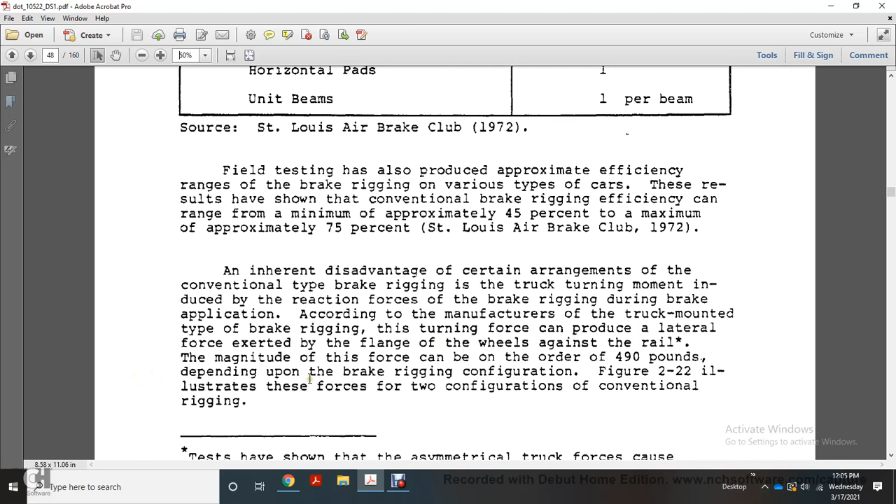Figure 222 illustrates these forces for two configurations of conventional rigging: the top rod over the bolster, dead lever anchored over the truck bolster, showing turning motion, friction movement, and lateral force.

Bottom rod under bolster, dead lever anchored to car body, top rod force, anchor to car body.

Interviews conducted with freight car wheel manufacturers, private car line leasing companies show a large portion of wheels removed due to flange wear produced on two wheels of the truck, one each axle, with asymmetrical wheel wear, as described by the truck turning moments produced by conventional brake rigging.

A secondary problem in the area of conventional brake rigging is uneven brake shoe force distribution produced on various wheels of the car, producing a higher average brake shoe force on one wheel compared to others, tending toward wheel sliding when the car is empty, and thermal loading resulting on wheels when loaded.

Conventional rigging can also bottom out when the rigging is not manually adjusted for multiple worn wheels, or for one worn wheel depending on the type of rigging, with additional brake shoe travel required for worn wheels causing the rigging to come into contact with the truck bolster center sill, making the brakes useless.

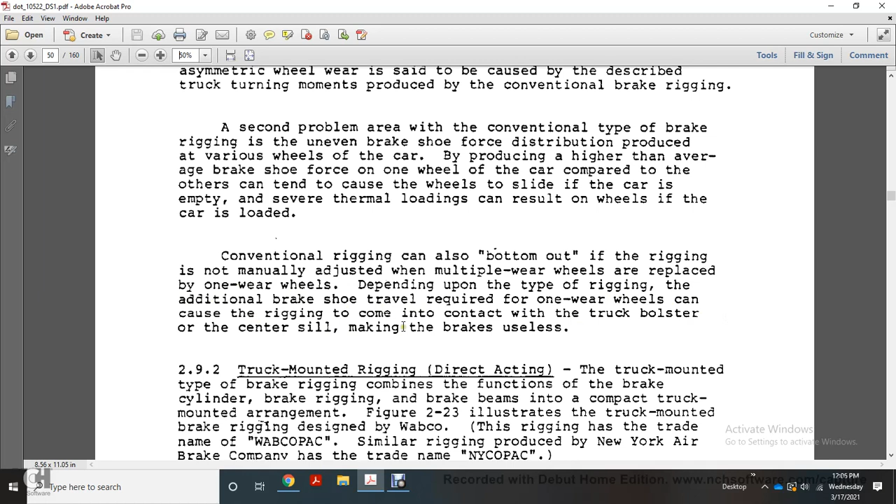Part 2.9.2, truck mounted rigging, direct acting. Truck mounted brake rigging combines the function of the brake cylinder with the brake rigging, the brake beam, and a compact truck mounted arrangement.

Figure 2-23 illustrates truck mounted brake rigging designed by Wabco, with rigging trade name WABCOPAC, similar rigging produced by the New York Air Brake Company with trade name NYCOPAC. It illustrates a typical truck mounted brake rigging, one truck shown.

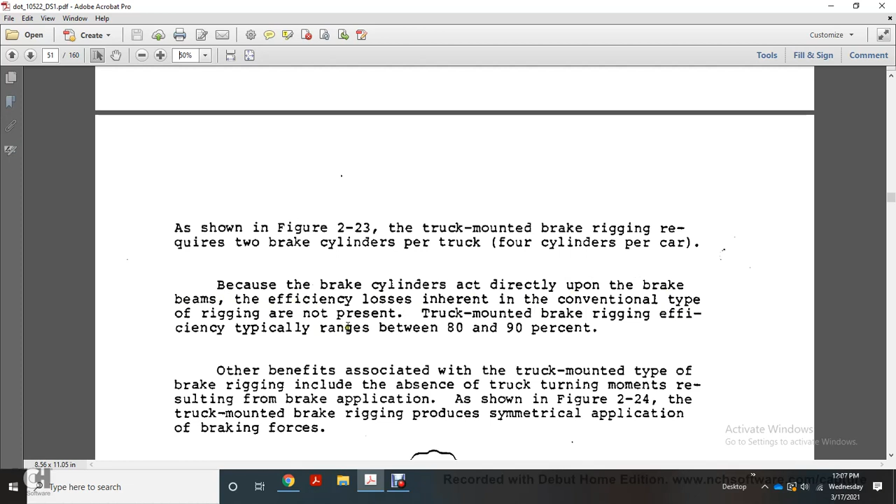Other benefits associated with the truck mounted type of brake rigging include the absence of turning moments resulting from brake application. As shown in figure 2-24, the truck mounted brake rigging produces a symmetrical application of braking force.

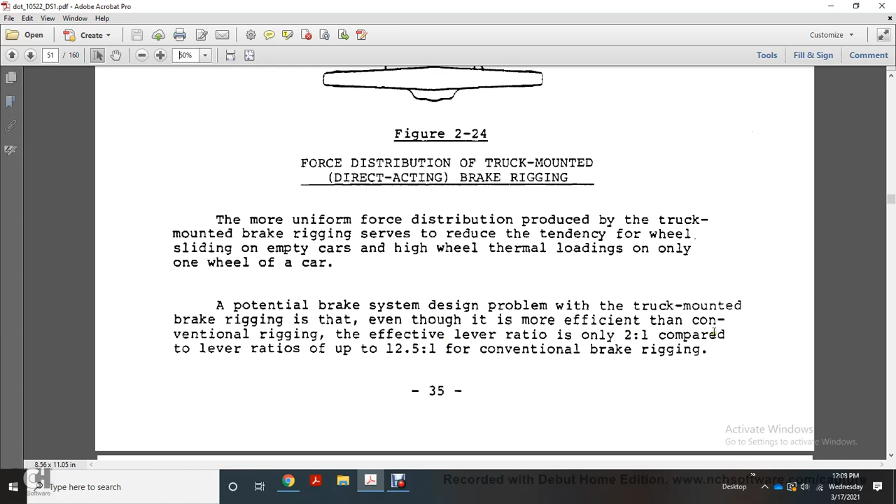In order to meet the net braking ratio for a high capacity car using truck mounted rigging, high friction brake shoes are required in conjunction with large diameter brake cylinders. Disadvantages associated with the truck mounted type of brake rigging have included higher cost.

Expense is mainly due to the requirement for additional brake cylinders, and damage to the brake cylinder on coal hoppers from exposure to flame during thawing operations. The cylinder is also frequently damaged when the car is derailed, though this more serious problem has recently been corrected.

The manufacturer has corrected this with a hand brake arrangement for truck mounted rigging; certain hand brakes with this rigging apply a brake shoe at only one end, the B end of the car, to provide adequate holding capacity.

One truck produces a brake force substantially greater than that produced by a truck equipped with conventional brake rigging. Furthermore, inspection by various ground crews would often result in incorrect interpretation of the release of the brake.

At the end of the car where the hand brake is located, crews assumed the brake had been released, resulting in a relatively high frequency of unreleased hand brakes. Combined with the substantially higher B end brake forces produced, this led to a high incidence of B end wheel removal due to slide spalling.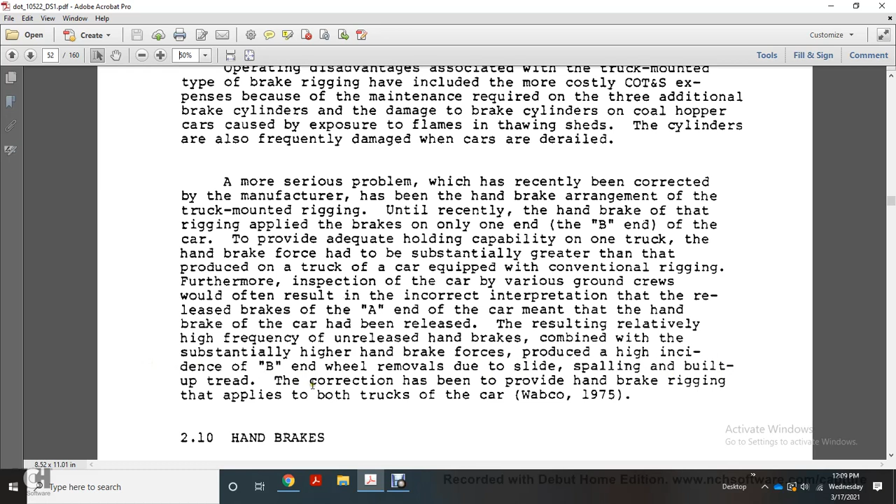Built-up tread correction has been provided with a hand brake rigging that applies to both trucks of the car, per Wabco 1975.

Part 2.10, hand brake. The main purpose of the hand brake is to hold the car stationary for long periods of time, although hand brakes are also used in a limited number of operations to manually control the speed of cars during classification, to reduce car impact force.

Hand brakes on freight cars are generally described in terms of physical application. These include vertical wheel assembly, horizontal wheel assembly usually with a drop shaft, and lever type assembly. Figure 2-25 illustrates a typical vertical wheel brake assembly.

The hand brake is manually operated with a crew member rotating the wheel, which winds the chain around the sprocket. The sprocket is geared to the wheel, restrained by a ratchet or a reduction gear, with the resulting force transferred to the brake cylinder and brake rigging through a combination of sheave wheels and bell cranks, depending on the design of the car and the type of brake rigging.

The hand brake must be released manually by activating a release lever, unwinding the wheel depending upon the design. Unfortunately, releasing the hand brake is sometimes overlooked.

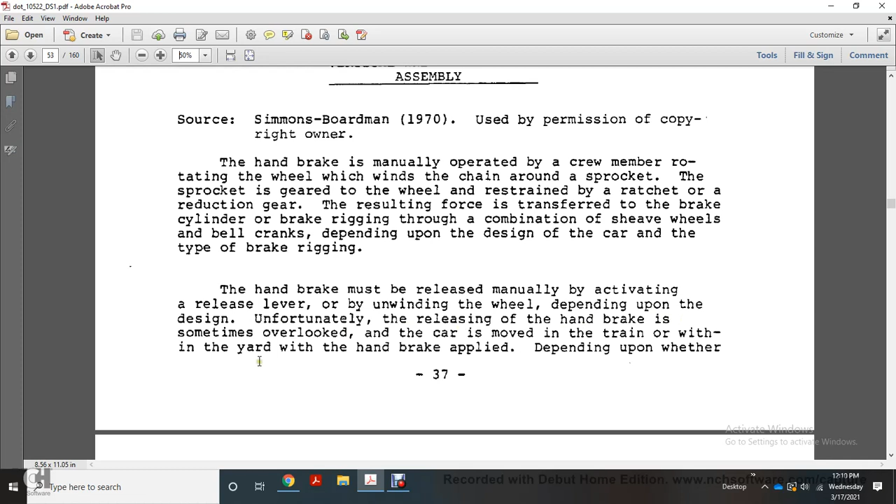If the car is moved in the train or within the yard with the hand brake still applied, depending upon whether the car is empty or loaded, the wheels might slide or skid, causing a high tread temperature with respect to performance specifications.

Hand brake specifications are published in the Association of American Railroads 1975B, and vary according to the type of brake rigging and brake shoes installed on the car.

2.11 Slack adjuster. The purpose of the slack adjuster is to remove the slack from the brake rigging as the brake shoe wears, maintaining proper piston travel. This travel must be maintained so the pressure-volume relationship between the air reservoir and the brake cylinder is not out of balance.

Brake rigging lever ratio is typically 8 to 1, meaning 1/8 of an inch of shoe wear results in a 1-inch piston travel extension. The FRA requires less than 9 inches of piston travel at the initial terminal, and the brake shoe condemning limit is specified.

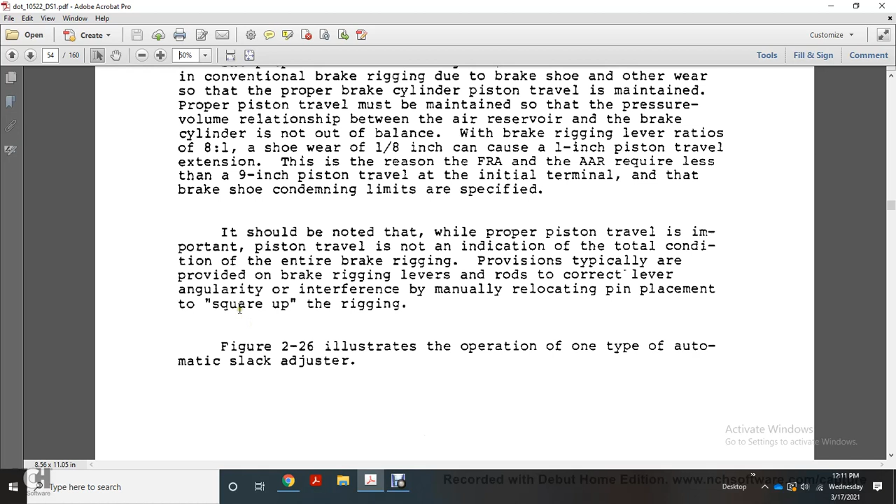Figure 2-26 illustrates the operation of one type of automatic slack adjuster, showing the slack adjuster and its adjustment mechanism.

As the brake shoe wears, the unit automatically winds more, and when the shoe is replaced with a new one, the unit automatically lengthens on the first brake application to restore proper piston travel.

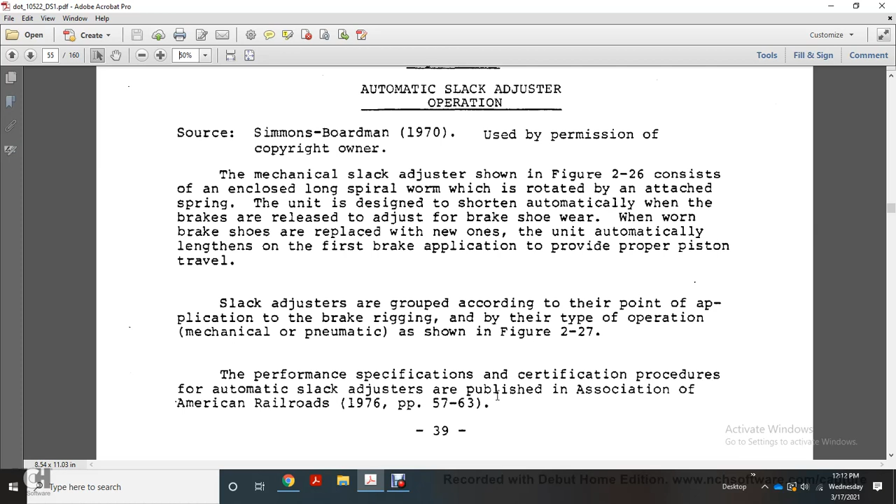The performance specification and certification procedure for automatic slack adjusters is published by the Association of American Railroads, which also shows the different typical AAR-approved automatic slack adjuster applications.

2.12 Brake shoe. A number of different types of brake shoes are present on freight cars, differing primarily in material construction, which alters friction, wear, and sparking characteristics. The standard cast iron brake shoe is often referred to as the low friction shoe.

This shoe has been in service since 1935 and is presently being phased out with the introduction of the high phosphorus cast metal shoe.

In 1965 the AAR adopted an alternative type of brake shoe known as the composite composition shoe, also referred to as the high friction shoe, developed partially for use with truck-mounted brake rigging, which allows a lower effective lever ratio required with higher friction shoes.

The required level of braking should be known, since not all composition shoes are highly frictional; low friction composition shoes also exist. Composition shoes used by manufacturers are primarily for locomotives, which typically have higher brake shoe force.

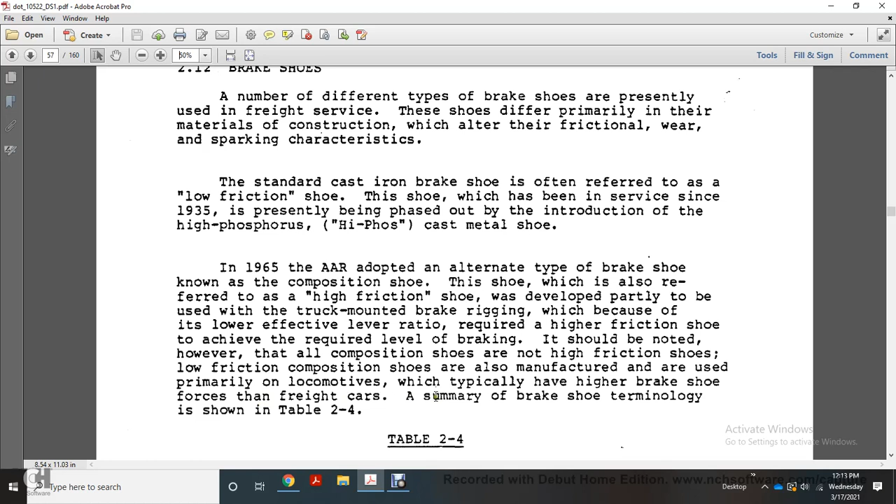For freight cars, a summary of brake shoe terminology is found in Table 2.4. Shoe materials include cast iron high phosphorus with no friction designation, cast iron with no high phosphorus and no high friction, cast iron with high phosphorus that has low friction, and composite shoes that have either low friction or high friction.

The functional performance of the cast iron brake shoe involves the frictional characteristics relative to the steel wheel of freight cars. The friction value varies considerably depending on operating conditions, with the extent of brake shoe force particularly directly affecting speed and friction condition. Table 2.5 considers the approximate range of cast iron brake shoe friction.

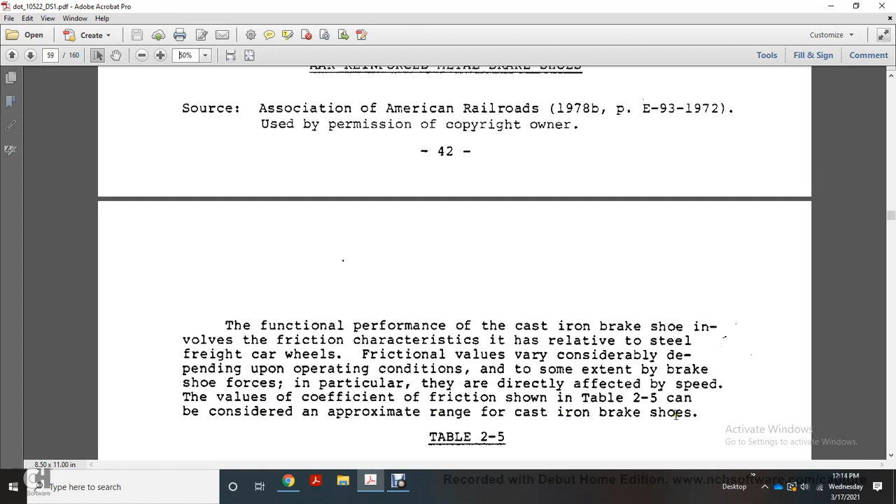2.12.2 Composition shoe. The composition brake shoe, developed in the early 1960s, provides the high frictional level required with truck mount brake rigging, and also provides improved wheel wear and thermal capacity characteristics.

Section 5 compares the high friction composition brake shoe with the cast iron shoe, with the specification published in AAR specification M-926-72. Figure 2-29, on the next page, illustrates the dimensions of the composition shoe and AAR shoe type designations.

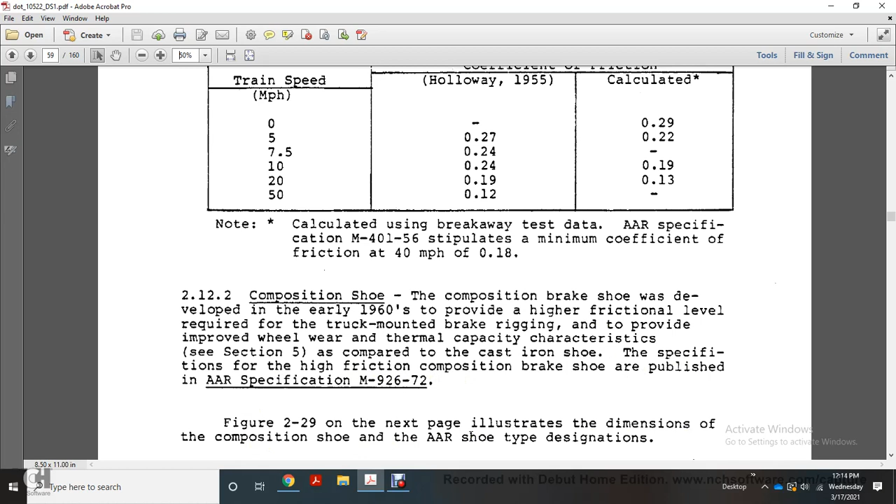Functional performance with the composite brake shoe indicates an overall high friction involved with the values for the composition; friction increases at zero train speed compared with the cast iron shoe, which has the coefficient of friction vary with the degree of the train speed. Table 2.6 illustrates the approximate value of the coefficient of friction for the composition high friction brake shoe; these values are calculated from the test data.

It shows 0, 5, 10, and then 10 through 15, 20, 25, and 30 have a 0.3 coefficient of friction rating. Dynamometer tests have demonstrated an increase of the wheel thermal capacity achievable with the composition brake shoe compared with the cast iron brake shoe. Results of interviews with professional industrial personnel generally support the conclusion that brake shoe and wheel wear are greatly reduced with the use of the composition brake shoe.

2.12.3 High phosphorus shoe. In an effort to reduce the sparking characteristic of the cast iron shoe, shoes with a high phosphorus content have been introduced as an alternate to the standard cast iron shoe. Frictional characteristics of the high phosphorus shoes are approximately the same as the cast iron shoe. Table 2.7 on the following page illustrates approximate values of the coefficient of friction of the high phosphorus shoe, calculated using the breakaway test data.

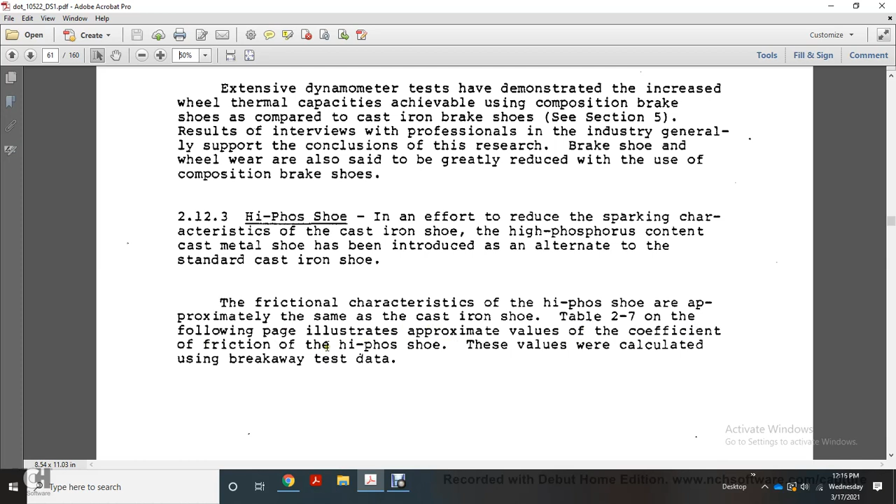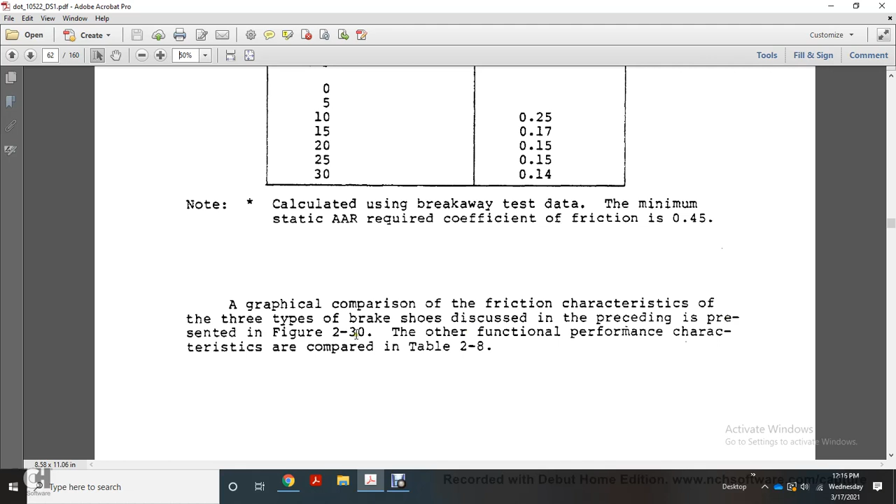Approximate values of the coefficient of friction of the high phosphorus brake shoe: 0, 5 and 10; 10 is 0.25, 15 is 0.17, 20 is 0.15, 25 is 0.15, 30 is 0.14. A graphical comparison of the friction characteristics of the three types of brake shoe discussed is presented in figure 2.30. Other functional performance characteristics are compared in table 2.8.

High phosphorus and composition brake shoe wear characteristics: compared with cast iron, high phosphorus shows reported improvement in brake shoe wear. Composition shows significant improvement relating to both shoe and wheel wear. Sparking characteristics compared with cast iron: high phosphorus is greatly improved, with almost no sparking; composition is virtually sparkless. Wheel thermal capacity compared to cast iron: high phosphorus unknown, composition improved.

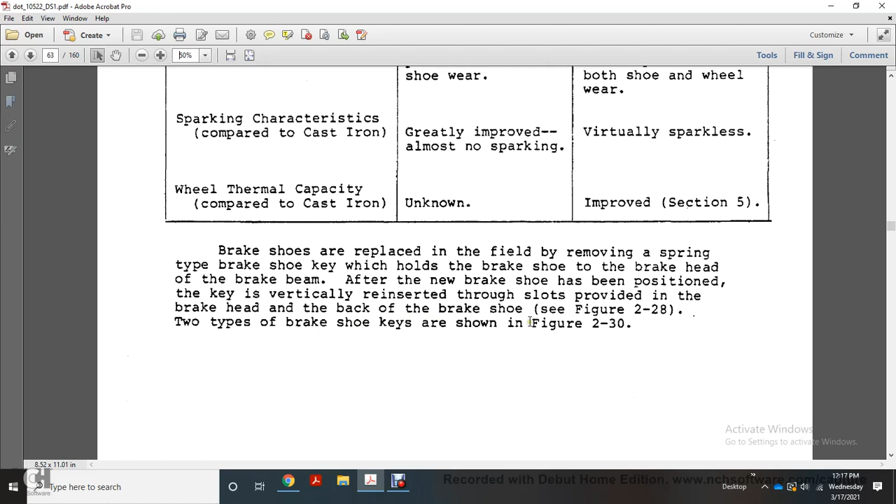Brake shoes are replaced in the field by removing the spring key that holds the brake shoe to the brake head on the brake beam. With the new brake shoe in position, the key is vertically reinserted through the slots provided in the brake head and the back of the brake shoe, figure 2.28. The two types of brake shoe keys are shown in figure 2.30.

Because of the substantially greater friction level of the high friction composition brake shoe, it is important that composition shoes are not misapplied to cars designed for low friction shoes. Although the cars presently have physical provisions in effect to prevent misapplication of the brake shoe, rules will become effective in 1977 making it physically impossible to misapply the brake shoe. Procedures effective presently, and those that will become effective in the future, are shown in table 2.9 on the following page.

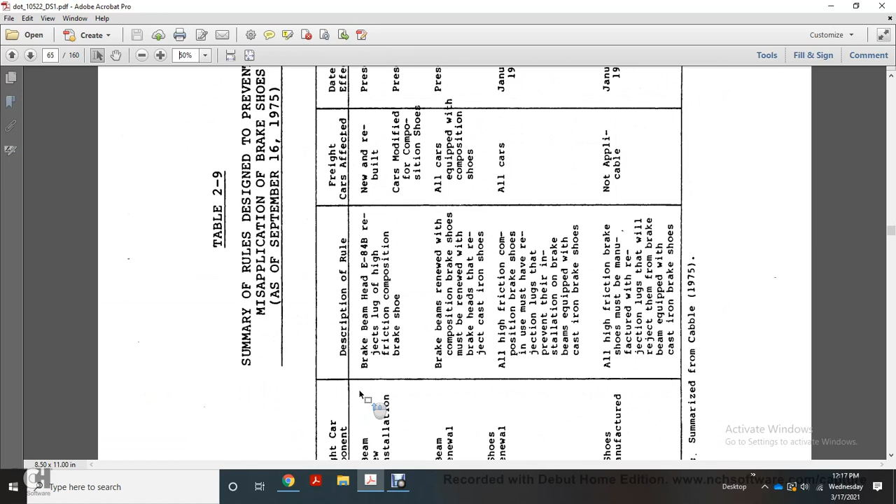Chapter 3, we'll go and look at this real quick, and then we'll cut the tape.

So this shows some of the rules designed to prevent misapplication of brake shoes. Brake beam, new installation: brake beams must have reject lugs for high friction composition brake shoes. Freight cars: effective on new and rebuilt cars with composition shoes, presently in the Official Manual of Interchange Rules, rule 88B. Brake beam renewal: brake beams renewed on cars equipped with composition brake shoes must be renewed with brake heads that reject cast iron shoes; all cars equipped with composition shoes are affected presently. Field Manual Interchange Rule 6B.

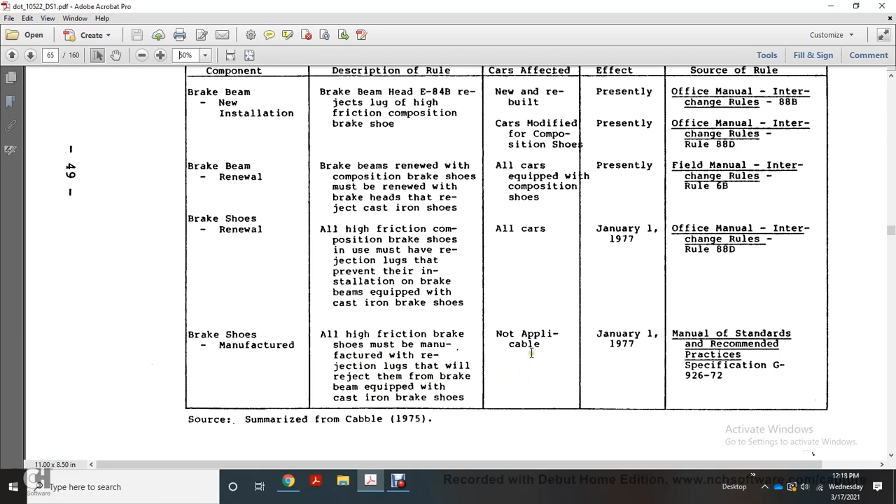Brake shoe renewal: all high friction composition brake shoes used must have rejection lugs to prevent their installation on brake beams equipped for cast iron brake shoes. All cars, January 1st, 1977. Official Manual Interchange Rules 88D. Brake shoe manufacture: all high friction brake shoes manufactured with rejection lugs will reject brake beams equipped for cast iron brake shoes; not applicable to cars. Effective January 1st, 1977. The Manual of Standards and Recommended Practices, specification G-926-72. Chapter 3. Operation Performance Design, Freight Car Air Brake Systems.